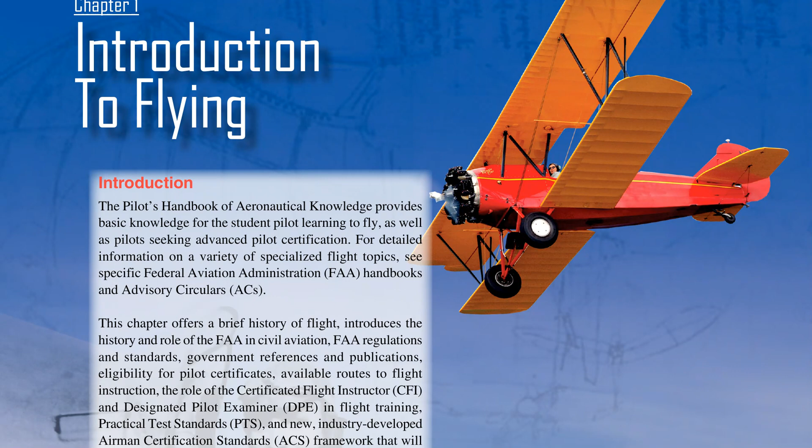For detailed information on a variety of specialized flight topics, see specific Federal Aviation Administration (FAA) handbooks and advisory circulars (ACs). This chapter offers a brief history of flight, introduces the history and role of the FAA in civil aviation, FAA regulations and standards, government references and publications, eligibility for pilot certificates, available routes to flight instruction,

the role of the Certificated Flight Instructor (CFI) and Designated Pilot Examiner (DPE) in flight training, practical test standards (PTS), and the new, industry-developed Airman Certification Standards (ACS) framework that will eventually replace the PTS.

History of flight. From prehistoric times, humans have watched the flight of birds, and longed to imitate them, but lacked the power to do so. Logic dictated that if the small muscles of birds can lift them into the air and sustain them, then the larger muscles of humans should be able to duplicate the feat. No one knew about the intricate mesh of muscles, sinew, heart, breathing system, and devices not unlike wing flaps, variable camber and spoilers of the modern airplane that enabled a bird to fly.

Still, thousands of years and countless lives were lost in attempts to fly like birds. The identity of the first birdmen who fitted themselves with wings and leapt off of cliffs in an effort to fly are lost in time, but each failure gave those who wished to fly questions that needed to be answered. Where had the wing flappers gone wrong? Philosophers, scientists, and inventors offered solutions, but no one could add wings to the human body and soar like a bird.

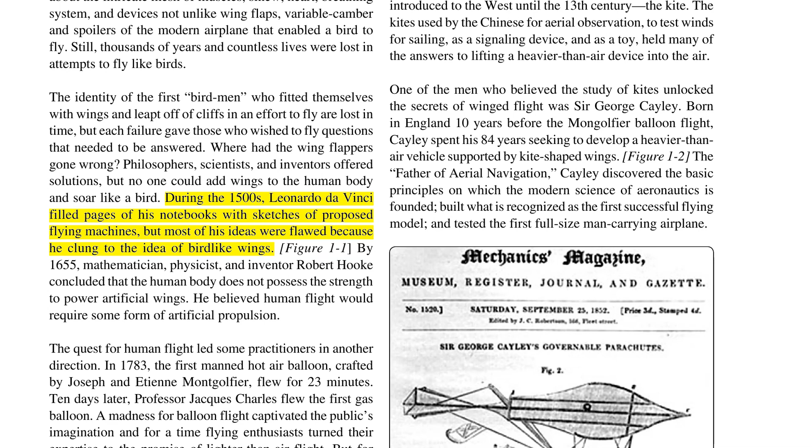During the 1500s, Leonardo da Vinci filled pages of his notebooks with sketches of proposed flying machines, but most of his ideas were flawed because he clung to the idea of bird-like wings. By 1655, mathematician, physicist, and inventor Robert Hooke concluded that the human body does not possess the strength to power artificial wings. He believed human flight would require some form of artificial propulsion.

The quest for human flight led some practitioners in another direction. In 1783, the first manned hot air balloon, crafted by Joseph and Etienne Montgolfier, flew for 23 minutes. 10 days later, Professor Jacques Charles flew the first gas balloon. A madness for balloon flight captivated the public's imagination, and for a time flying enthusiasts turned their expertise to the promise of lighter-than-air flight. But for all its majesty in the air, the balloon was little more than a billowing heap of cloth capable of no more than a one-way, downwind journey.

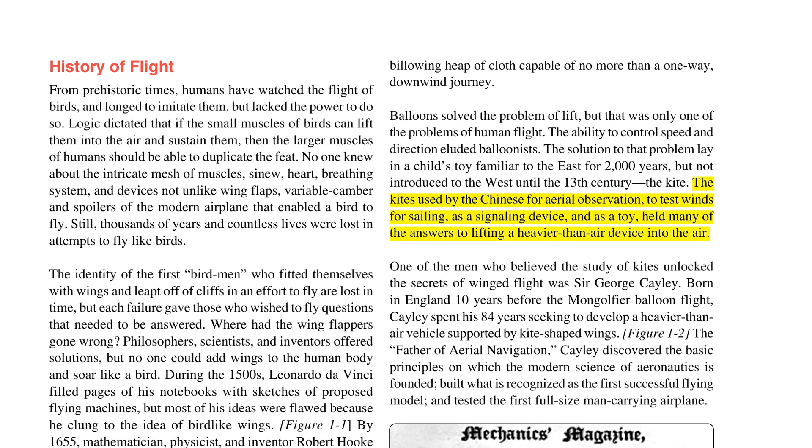Balloons solved the problem of lift, but that was only one of the problems of human flight. The ability to control speed and direction eluded balloonists. The solution to that problem lay in a child's toy familiar to the East for 2,000 years, but not introduced to the West until the 13th century, the kite. The kites used by the Chinese for aerial observation, to test winds for sailing, as a signaling device, and as a toy, held many of the answers to lifting a heavier-than-air device into the air.

One of the men who believed the study of kites unlocked the secrets of winged flight was Sir George Cayley. Born in England 10 years before the Montgolfier balloon flight, Cayley spent his 84 years seeking to develop a heavier-than-air vehicle supported by kite-shaped wings. The father of aerial navigation, Cayley discovered the basic principles on which the modern science of aeronautics is founded, built what is recognized as the first successful flying model, and tested the first full-size man-carrying airplane.

For the half-century after Cayley's death, countless scientists, flying enthusiasts, and inventors worked toward building a powered flying machine. Men, such as William Samuel Henson, who designed a huge monoplane that was propelled by a steam engine housed inside the fuselage, and Otto Lilienthal, who proved human flight in aircraft heavier than air was practical, worked toward the dream of powered flight. A dream turned into reality by Wilbur and Orville Wright at Kitty Hawk, North Carolina, on December 17, 1903.

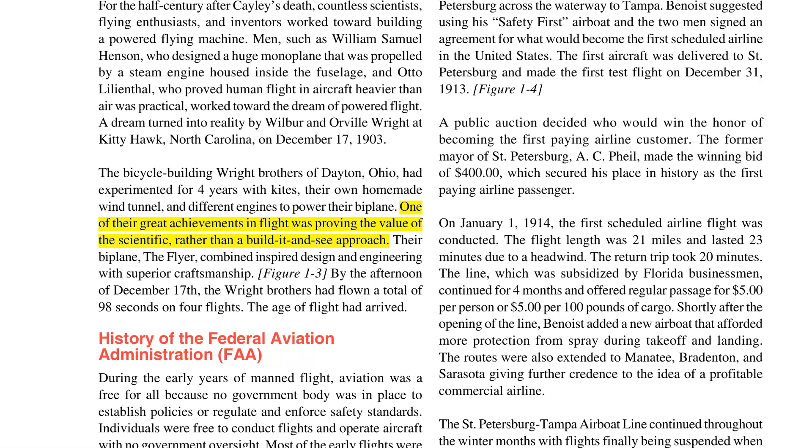The bicycle-building Wright brothers of Dayton, Ohio, had experimented for 4 years with kites, their own homemade wind tunnel, and different engines to power their biplane. One of their great achievements in flight was proving the value of the scientific, rather than a build-it-and-see approach. Their biplane, the Flyer, combined inspired design and engineering with superior craftsmanship. By the afternoon of December 17, the Wright brothers had flown a total of 98 seconds on 4 flights. The age of flight had arrived.

History of the Federal Aviation Administration (FAA). During the early years of manned flight, aviation was a free-for-all because no government body was in place to establish policies or regulate and enforce safety standards.

Individuals were free to conduct flights and operate aircraft with no government oversight. Most of the early flights were conducted for sport. Aviation was expensive and became the playground of the wealthy. Since these early airplanes were small, many people doubted their commercial value. One group of individuals believed otherwise, and they became the genesis for modern airline travel.

P. E. Fansler, a Florida businessman living in St. Petersburg, approached Tom Benoist of the Benoist Aircraft Company in St. Louis, Missouri, about starting a flight route from St. Petersburg across the waterway to Tampa. Benoist suggested using his Safety First airboat, and the two men signed an agreement for what would become the first scheduled airline in the United States. The first aircraft was delivered to St. Petersburg and made the first test flight on December 31, 1913.

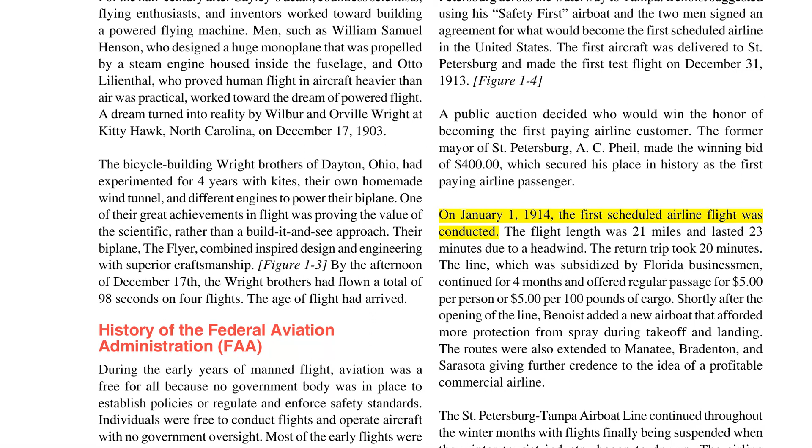Figure 1-4. A public auction decided who would win the honor of becoming the first paying airline customer. The former mayor of St. Petersburg, A.C. Pheil, made the winning bid of $400, which secured his place in history as the first paying airline passenger. On January 1, 1914, the first scheduled airline flight was conducted. The flight length was 21 miles and lasted 23 minutes due to a headwind. The return trip took 20 minutes.

The line, which was subsidized by Florida businessmen, continued for 4 months and offered regular passage for $5 per person or $5 per 100 pounds of cargo. Shortly after the opening of the line, Benoist added a new airboat that afforded more protection from spray during takeoff and landing. The routes were also extended to Manatee, Bradenton, and Sarasota, giving further credence to the idea of a profitable commercial airline.

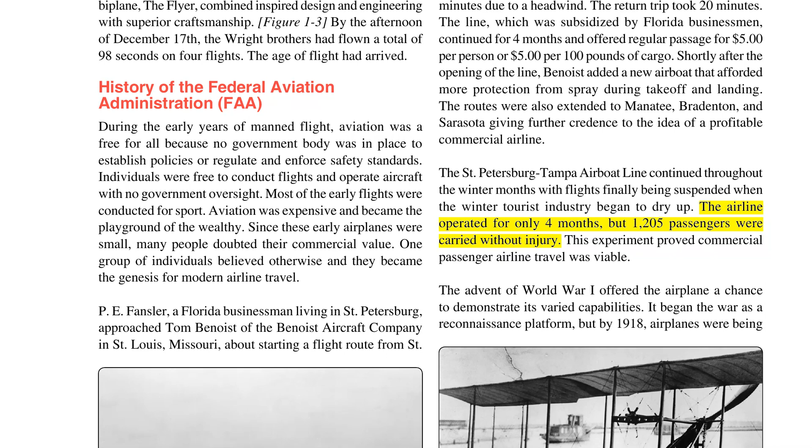The St. Petersburg-Tampa airboat line continued throughout the winter months, with flights finally being suspended when the winter tourist industry began to dry up. The airline operated for only 4 months, but 1,205 passengers were carried without injury. This experiment proved commercial passenger airline travel was viable.

The advent of World War I offered the airplane a chance to demonstrate its varied capabilities. It began the war as a reconnaissance platform, but by 1918, airplanes were being mass-produced to serve as fighters, bombers, trainers, as well as reconnaissance platforms. Aviation advocates continued to look for ways to use airplanes. Airmail service was a popular idea, but the war prevented the Postal Service from having access to airplanes. The War Department and Postal Service reached an agreement in 1918. The Army would use the mail service to train its pilots in flying cross-country.

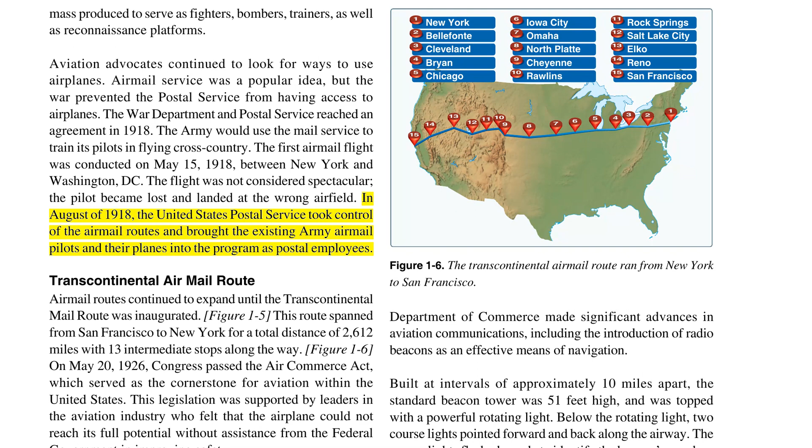The first airmail flight was conducted on May 15, 1918, between New York and Washington, D.C. The flight was not considered spectacular. The pilot became lost and landed at the wrong airfield. In August of 1918, the United States Postal Service took control of the airmail routes and brought the existing Army airmail pilots and their planes into the program as postal employees. Transcontinental Airmail Route. Airmail routes continued to expand until the Transcontinental Mail Route was inaugurated. Figure 1-5. This route spanned from San Francisco to New York for a total distance of 2,612 miles with 13 intermediate stops along the way.

Figure 1-6. On May 20, 1926, Congress passed the Air Commerce Act, which served as the cornerstone for aviation within the United States. This legislation was supported by leaders in the aviation industry who felt that the airplane could not reach its full potential without assistance from the federal government in improving safety. The Air Commerce Act charged the Secretary of Commerce with fostering air commerce, issuing and enforcing air traffic rules, licensing pilots, certificating aircraft, establishing airways, and operating and maintaining aids to air navigation.

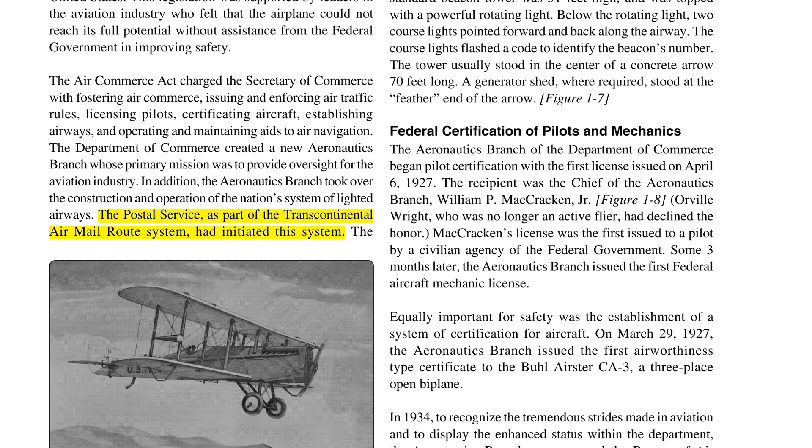The Department of Commerce created a new aeronautics branch whose primary mission was to provide oversight for the aviation industry. In addition, the aeronautics branch took over the construction and operation of the nation's system of lighted airways. The Postal Service, as part of the Transcontinental Air Mail Route System, had initiated this system. The Department of Commerce made significant advances in aviation communications, including the introduction of radio beacons as an effective means of navigation. Built at intervals of approximately 10 miles apart, the standard beacon tower was 51 feet high, and was topped with a powerful rotating light.

Below the rotating light, 2 course lights pointed forward and back along the airway. The course lights flashed a code to identify the beacon's number. The tower usually stood in the center of a concrete arrow 70 feet long. A generator shed, where required, stood at the feather end of the arrow.

Figure 1-7. Federal Certification of Pilots and Mechanics. The Aeronautics Branch of the Department of Commerce began pilot certification with the first license issued on April 6, 1927. The recipient was the Chief of the Aeronautics Branch, William P. MacCracken, Jr. Figure 1-8. Orville Wright, who was no longer an active flyer, had declined the honor.

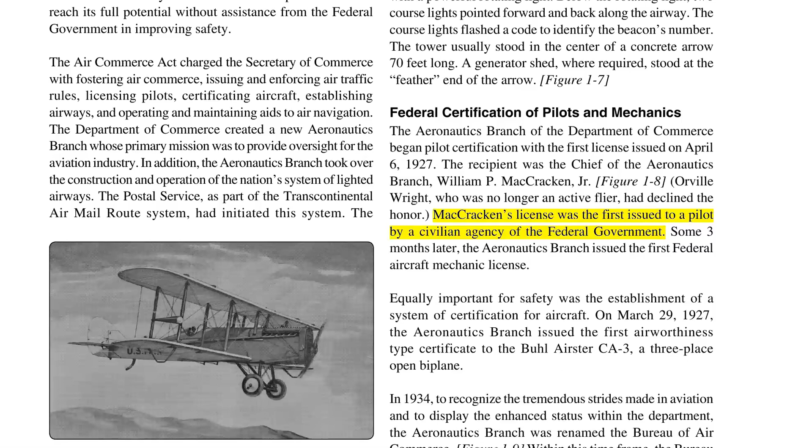MacCracken's license was the first issued to a pilot by a civilian agency of the federal government. Some 3 months later, the Aeronautics Branch issued the first federal aircraft mechanic license. Equally important for safety was the establishment of a system of certification for aircraft. On March 29, 1927, the Aeronautics Branch issued the first airworthiness type certificate to the Buhl Airster CA-3 3-place open

biplane. In 1934, to recognize the tremendous strides made in aviation and to display the enhanced status within the department, the Aeronautics Branch was renamed the Bureau of Air Commerce. Figure 1-9. Within this time frame, the Bureau of Air Commerce brought together a group of airlines and encouraged them to form the first 3 air traffic control (ATC) facilities along the established air routes.

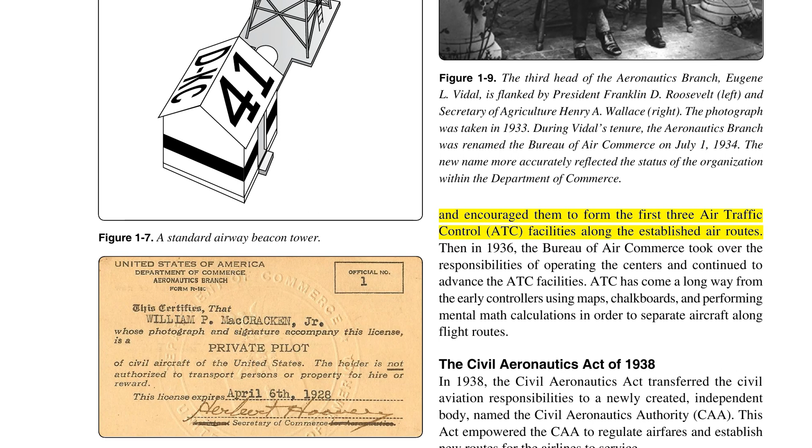Then in 1936, the Bureau of Air Commerce took over the responsibilities of operating the centers and continued to advance the ATC facilities. ATC has come a long way from the early controllers using maps, chalkboards, and performing mental math calculations in order to separate aircraft along flight routes.

The Civil Aeronautics Act of 1938. In 1938, the Civil Aeronautics Act transferred the civil aviation responsibilities to a newly created, independent body, named the Civil Aeronautics Authority (CAA). This act empowered the CAA to regulate airfares and establish new routes for the airlines to service. President Franklin Roosevelt split the CAA into two agencies, the Civil Aeronautics Administration (CAA) and the Civil Aeronautics Board (CAB). Both agencies were still part of the Department of Commerce, but the CAB functioned independently of the Secretary of Commerce.

The role of the CAA was to facilitate ATC, certification of airmen and aircraft, rule enforcement, and the development of new airways. The CAB was charged with rule-making to enhance safety, accident investigation, and the economic regulation of the airlines. Then in 1946, Congress gave the CAA the responsibility of administering the Federal Airport Program. This program was designed to promote the establishment of civil airports throughout the country.

The Federal Aviation Act of 1958. By mid-century, air traffic had increased and jet aircraft had been introduced into the civil aviation arena. A series of mid-air collisions underlined the need for more regulation of the aviation industry. Aircraft were not only increasing in numbers, but were now streaking across the skies at much higher speeds.

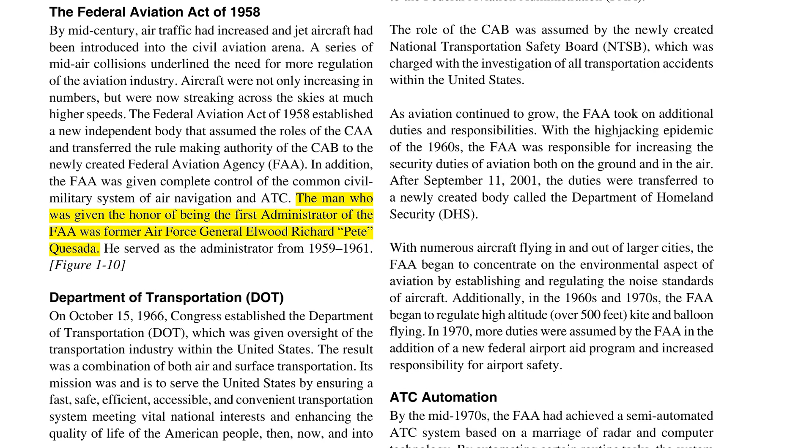The Federal Aviation Act of 1958 established a new independent body that assumed the roles of the CAA and transferred the rule-making authority of the CAB to the newly created Federal Aviation Agency (FAA). In addition, the FAA was given complete control of the Common Civil-Military System of Air Navigation and ATC. The man who was given the honor of being the first administrator of the FAA was former Air Force General Elwood Richard "Pete" Quesada. He served as the administrator from 1959 to 1961.

Figure 1-10. Department of Transportation (DOT). On October 15, 1966, Congress established the Department of Transportation (DOT), which was given oversight of the transportation industry within the United States. The result was a combination of both air and surface transportation. Its mission was and is to serve the United States by ensuring a fast, safe, efficient, accessible, and convenient transportation system meeting vital national interests and enhancing the quality of life of the American people, then, now, and into the future. The DOT began operation on April 1, 1967.

At this same time, the Federal Aviation Agency was renamed to the Federal Aviation Administration (FAA). The role of the CAB was assumed by the newly created National Transportation Safety Board (NTSB), which was charged with the investigation of all transportation accidents within the United States. As aviation continued to grow, the FAA took on additional duties and responsibilities. With the hijacking epidemic of the 1960s, the FAA was responsible for increasing the security duties of aviation both on the ground and in the air. After September 11, 2001, the duties were transferred to a newly created body called the Department of Homeland Security (DHS).

With numerous aircraft flying in and out of larger cities, the FAA began to concentrate on the environmental aspect of aviation by establishing and regulating the noise standards of aircraft. Additionally, in the 1960s and 1970s, the FAA began to regulate high altitude (over 500 feet) kite and balloon flying. In 1970, more duties were assumed by the FAA in the addition of a new federal airport aid program and increased responsibility for airport safety.

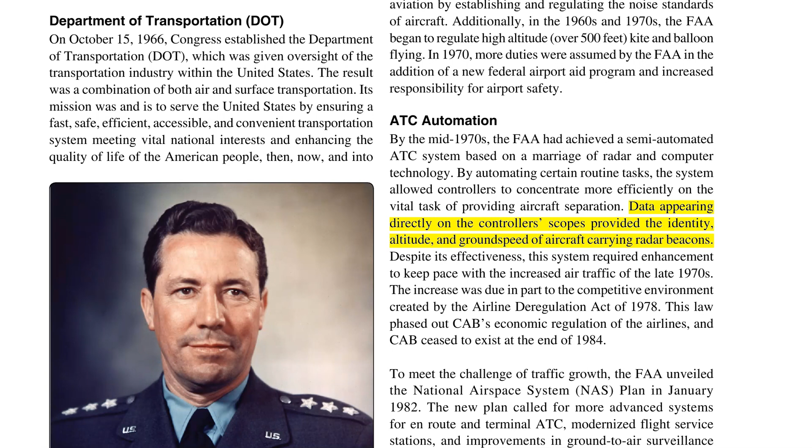ATC automation. By the mid-1970s, the FAA had achieved a semi-automated ATC system based on a marriage of radar and computer technology. By automating certain routine tasks, the system allowed controllers to concentrate more efficiently on the vital task of providing aircraft separation. Data appearing directly on the controller's scopes provided the identity, altitude, and ground speed of aircraft carrying radar beacons. Despite its effectiveness, this system required enhancement to keep pace with the increased air traffic of the late 1970s.

The increase was due in part to the competitive environment created by the Airline Deregulation Act of 1978. This law phased out CAB's economic regulation of the airlines, and CAB ceased to exist at the end of 1984.

To meet the challenge of traffic growth, the FAA unveiled the National Airspace System (NAS) plan in January 1982. The new plan called for more advanced systems for en route and terminal ATC, modernized flight service stations, and improvements in ground-to-air surveillance and communication.

The Professional Air Traffic Controllers Organization (PATCO) strike. While preparing the NAS plan, the FAA faced a strike by key members of its workforce. An earlier period of discord between management and the Professional Air Traffic Controllers Organization, PATCO, culminated in a 1970 sickout by 3,000 controllers.

Although controllers subsequently gained additional wage and retirement benefits, another period of tension led to an illegal strike in August 1981. The government dismissed over 11,000 strike participants and decertified PATCO. By the spring of 1984, the FAA ended the last of the special restrictions imposed to keep the airspace system operating safely during the strike.

The Airline Deregulation Act of 1978. Until 1978, the CAB regulated many areas of commercial aviation such as fares, routes, and schedules. The Airline Deregulation Act of 1978, however, removed many of these controls, thus changing the face of civil aviation in the United States. After deregulation, unfettered free competition ushered in a new era in passenger air travel.

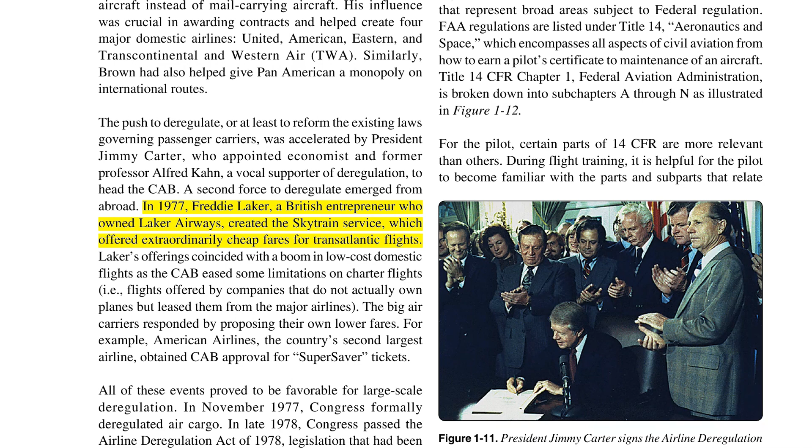In 1977, Freddie Laker, a British entrepreneur who owned Laker Airways, created the Skytrain service, which offered extraordinarily cheap fares for transatlantic flights. Laker's offerings coincided with a boom in low-cost domestic flights as the CAB eased some limitations on charter flights, i.e., flights offered by companies that do not actually own planes but lease them from the major airlines.

The big air carriers responded by proposing their own lower fares. For example, American Airlines, the country's second-largest airline, obtained CAB approval for SuperSaver tickets. All of these events proved to be favorable for large-scale deregulation. In November 1977, Congress formally deregulated air cargo.

In late 1978, Congress passed the Airline Deregulation Act of 1978, legislation that had been principally authored by Senators Edward Kennedy and Howard Cannon. [Figure 1-11] There was stiff opposition to the bill, from the major airlines who feared free competition, from labor unions who feared non-union employees, and from safety advocates who feared that safety would be sacrificed. Public support was, however, strong enough to pass the act.

The act appeased the major airlines by offering generous subsidies and pleased workers by offering high unemployment benefits if they lost their jobs as a result. The most important effect of the act, whose laws were slowly phased in, was on the passenger market. For the first time in 40 years, airlines could enter the market or, from 1981, expand their routes as they saw fit. Airlines, from 1982, also had full freedom to set their fares. In 1984, the CAB was finally abolished since its primary duty of regulating the airline industry was no longer necessary.

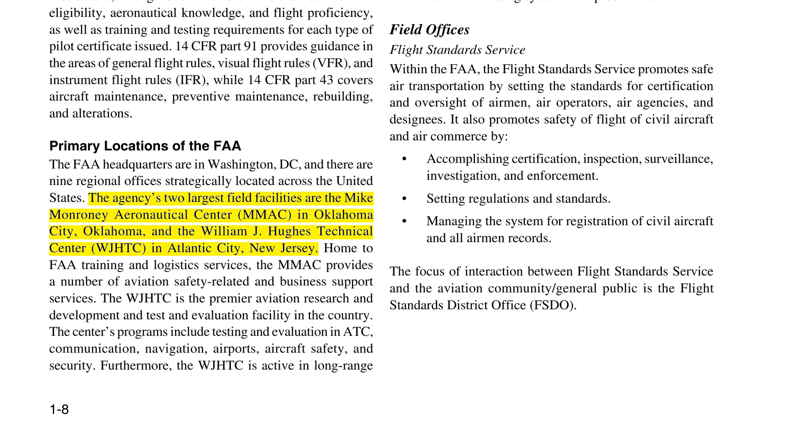Primary locations of the FAA. The FAA headquarters are in Washington, D.C., and there are 9 regional offices strategically located across the United States. The agency's 2 largest field facilities are the Mike Monroney Aeronautical Center (MMAC) in Oklahoma City, Oklahoma, and the William J. Hughes Technical Center (WJHTC) in Atlantic City, New Jersey. Home to FAA training and logistics services, the MMAC provides a number of aviation safety-related and business support services.

The WJHTC is the premier aviation research and development and test and evaluation facility in the country. The center's programs include testing and evaluation in ATC, communication, navigation, airports, aircraft safety, and security. Furthermore, the WJHTC is active in long-range development of innovative aviation systems and concepts, development of new ATC equipment and software, and modification of existing systems and procedures.

Field offices. Flight Standards Service. Within the FAA, the Flight Standards Service promotes safe air transportation by setting the standards for certification and oversight of airmen, air operators, air agencies, and designees. It also promotes safety of flight of civil aircraft and air commerce by accomplishing certification, inspection, surveillance, investigation, and enforcement, setting regulations and standards, managing the system for registration of civil aircraft and all airmen records. The focus of interaction between Flight Standards Service and the aviation community/general public is the Flight Standards District Office (FSDO).

Flight Standards District Office (FSDO). The FAA has approximately 80 FSDOs. Figure 1-13. These offices provide information and services for the aviation community. FSDO phone numbers are listed in the telephone directory under Government Offices, DOT, FAA. Another convenient method of finding a local office is to use the FSDO locator available at www.faa.gov/about/office_org/field_offices/fsdo.

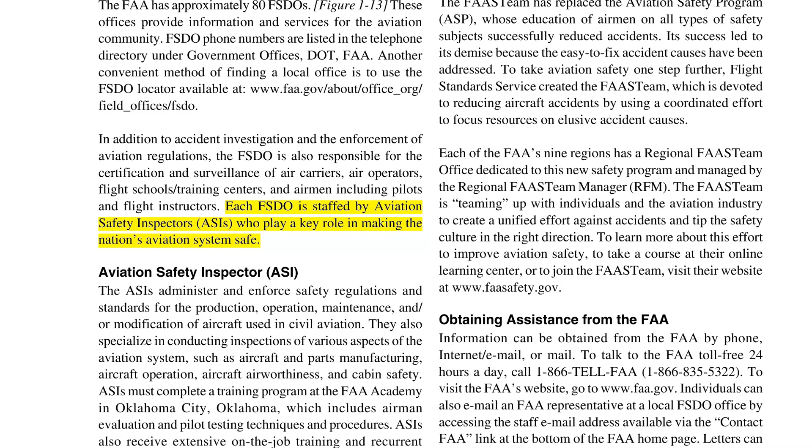In addition to accident investigation and the enforcement of aviation regulations, the FSDO is also responsible for the certification and surveillance of air carriers, air operators, flight schools/training centers, and airmen including pilots and flight instructors. Each FSDO is staffed by aviation safety inspectors (ASIs), who play a key role in making the nation's aviation system safe.

Aviation Safety Inspector (ASI). The ASIs administer and enforce safety regulations and standards for the production, operation, maintenance, and/or modification of aircraft used in civil aviation. They also specialize in conducting inspections of various aspects of the aviation system, such as aircraft and parts manufacturing, aircraft operation, aircraft airworthiness, and cabin safety.

ASIs must complete a training program at the FAA Academy in Oklahoma City, Oklahoma, which includes airman evaluation and pilot testing techniques and procedures. ASIs also receive extensive on-the-job training and recurrent training on a regular basis. The FAA has approximately 3,700 inspectors located in its FSDO offices. All questions concerning pilot certification, and/or requests for other aviation information or services, should be directed to the local FSDO.

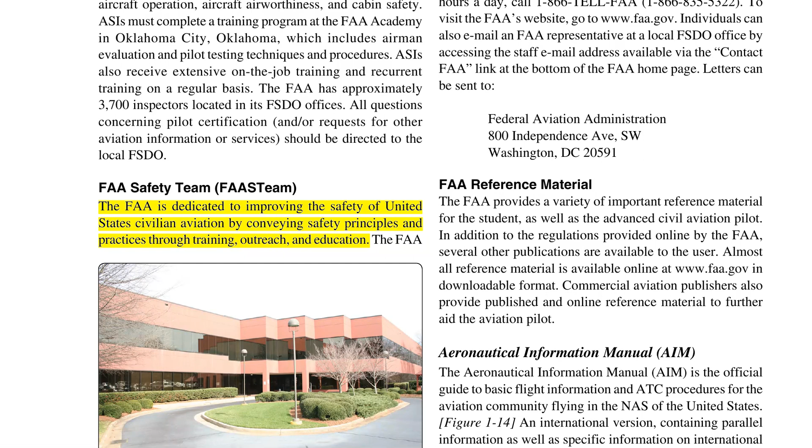FAA Safety Team (FAASTeam). The FAA is dedicated to improving the safety of United States civilian aviation by conveying safety principles and practices through training, outreach, and education. The FAASTeam exemplifies this commitment. The FAASTeam has replaced the Aviation Safety Program (ASP), whose education of airmen on all types of safety subjects successfully reduced accidents. Its success led to its demise because the easy-to-fix accident causes have been addressed. To take aviation safety one step further, Flight Standards Service created the FAASTeam, which is devoted to reducing aircraft accidents by using a coordinated effort to focus resources on elusive accident causes.

Each of the FAA's 9 regions has a regional FAASTeam office dedicated to this new safety program and managed by the Regional FAASTeam Manager (RFM). The FAASTeam is teaming up with individuals in the aviation industry to create a unified effort against accidents and tip the safety culture in the right direction. To learn more about this effort to improve aviation safety, to take a course at their online learning center, or to join the FAASTeam, visit their website at www.faasafety.gov.

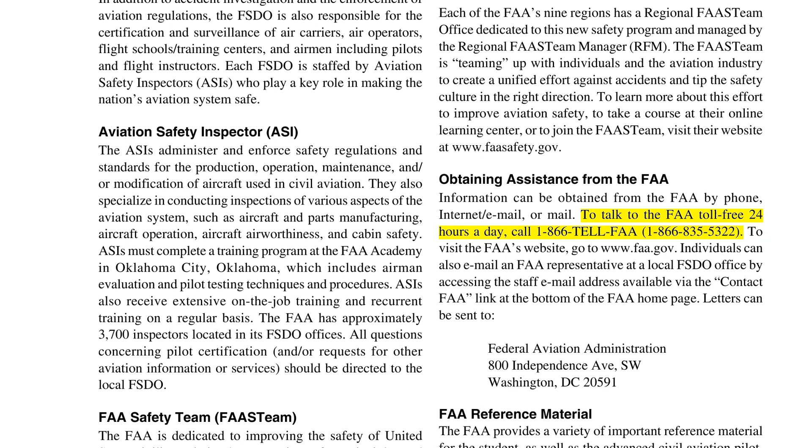Obtaining assistance from the FAA. Information can be obtained from the FAA by phone, internet/email, or mail. To talk to the FAA toll-free 24 hours a day, call 1-866-TELL-FAA, 1-866-835-5322. To visit the FAA's website, go to www.faa.gov. Individuals can also email an FAA representative at a local FSDO office by accessing the staff email address available via the Contact FAA link at the bottom of the FAA homepage. Letters can be sent to

FAA reference material. The FAA provides a variety of important reference material for the student, as well as the advanced civil aviation pilot. In addition to the regulations provided online by the FAA, several other publications are available to the user. Almost all reference material is available online at www.faa.gov in downloadable format.

Commercial aviation publishers also provide published and online reference material to further aid the aviation pilot. Aeronautical Information Manual, AIM. The Aeronautical Information Manual, AIM, is the official guide to basic flight information and ATC procedures for the aviation community flying in the NAS of the United States. Figure 1-14, an international version, containing parallel information as well as specific information on international airports, is also available.

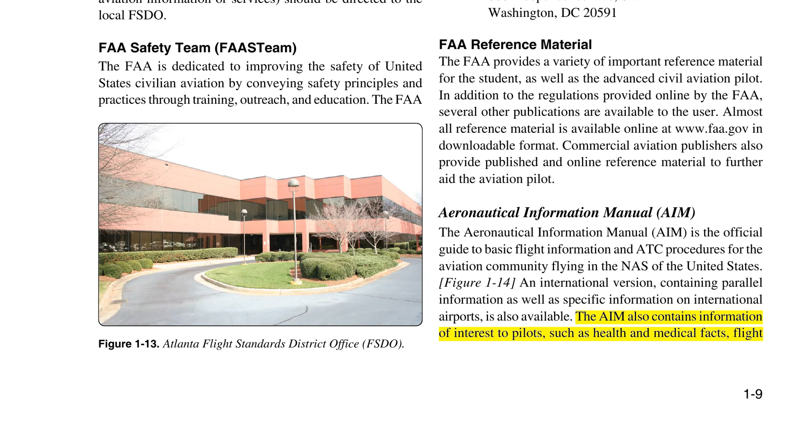The AIM also contains information of interest to pilots, such as health and medical facts, flight, Federal Aviation Administration, 800 Independence Avenue, Southwest, Washington, D.C. 20591. Safety, a pilot/controller glossary of terms used in the system, and information on safety, accidents, and reporting of hazards.

This manual is offered for sale on a subscription basis or is available online at http://bookstore.gpo.gov. Order forms are provided at the beginning of the manual or online and should be sent to the Superintendent of Documents, United States Government Printing Office, GPO. The AIM is complemented by other operational publications that are available via separate subscriptions or online.

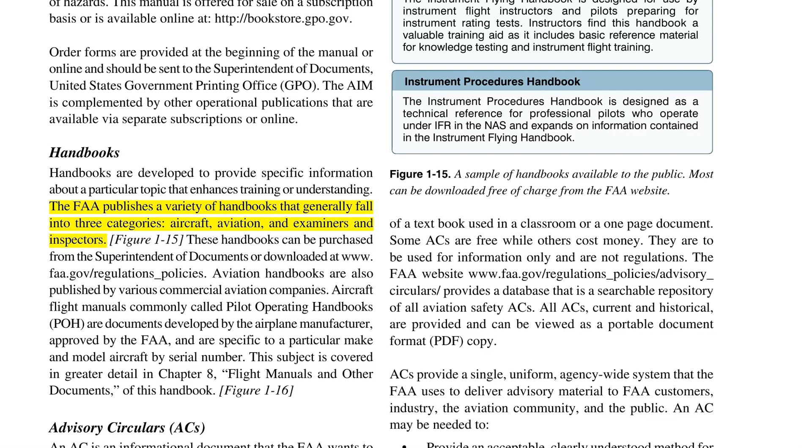Handbooks. Handbooks are developed to provide specific information about a particular topic that enhances training or understanding. The FAA publishes a variety of handbooks that generally fall into three categories: aircraft, aviation, and examiners and inspectors. Figure 1-15. These handbooks can be purchased from the Superintendent of Documents or downloaded at www.faa.gov/regulations_policies. Aviation handbooks are also published by various commercial aviation companies.

Aircraft flight manuals, commonly called pilot operating handbooks, POH, are documents developed by the airplane manufacturer, approved by the FAA, and are specific to a particular make and model aircraft by serial number. This subject is covered in greater detail in Chapter 8, Flight Manuals and Other Documents, of this handbook.

Figure 1-16. Advisory Circulars, ACs. An AC is an informational document that the FAA wants to distribute to the aviation community. This can be in the form: Aeronautical Information Manual, AIM. The Aeronautical Information Manual is designed to provide the aviation community with basic flight information and ATC procedures for use in the NAS of the United States. It also contains the fundamentals required in order to fly in the United States NAS, including items of interest to pilots concerning health/medical facts, factors affecting flight safety, etc.

Aircraft Flying Handbooks, by category. The aircraft flying handbooks are designed as technical manuals to introduce basic pilot skills and knowledge that are essential for piloting aircraft. They provide information on transition to other aircraft and the operation of various aircraft systems.

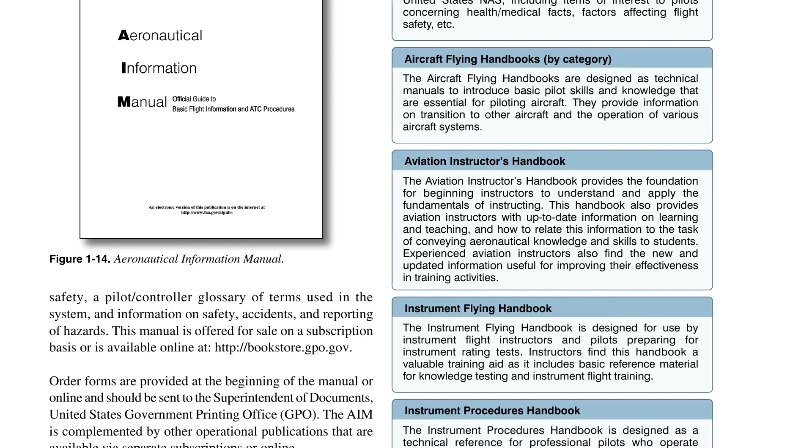Aviation Instructor's Handbook. The Aviation Instructor's Handbook provides the foundation for beginning instructors to understand and apply the fundamentals of instructing. This handbook also provides aviation instructors with up-to-date information on learning and teaching, and how to relate this information to the task of conveying aeronautical knowledge and skills to students. Experienced aviation instructors also find the new and updated information useful for improving their effectiveness in training activities.

Instrument Flying Handbook. The Instrument Flying Handbook is designed for use by instrument flight instructors and pilots preparing for instrument rating tests. Instructors find this handbook a valuable training aid as it includes basic reference material for knowledge testing and instrument flight training. Instrument Procedures Handbook. The Instrument Procedures Handbook is designed as a technical reference for professional pilots who operate under IFR in the NAS and expands on information contained in the Instrument Flying Handbook.

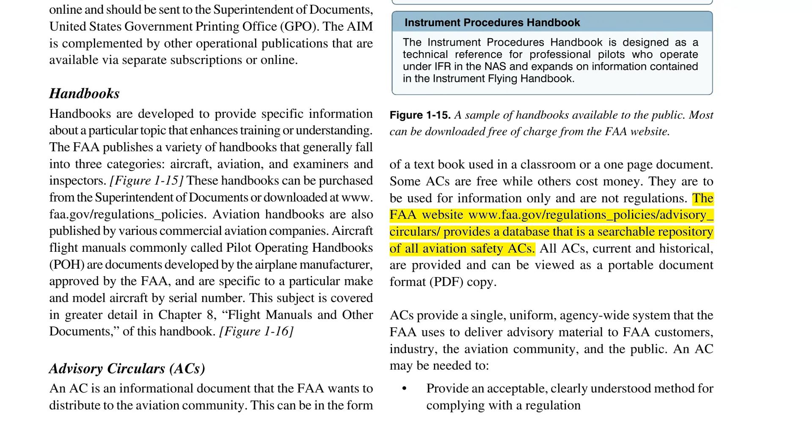Of a textbook used in a classroom or a one-page document. Some ACs are free while others cost money. They are to be used for information only and are not regulations. The FAA website www.faa.gov/regulations_policies/advisory_circulars/ provides a database that is a searchable repository of all aviation safety ACs. All ACs, current and historical, are provided and can be viewed as a portable document format, PDF, copy.

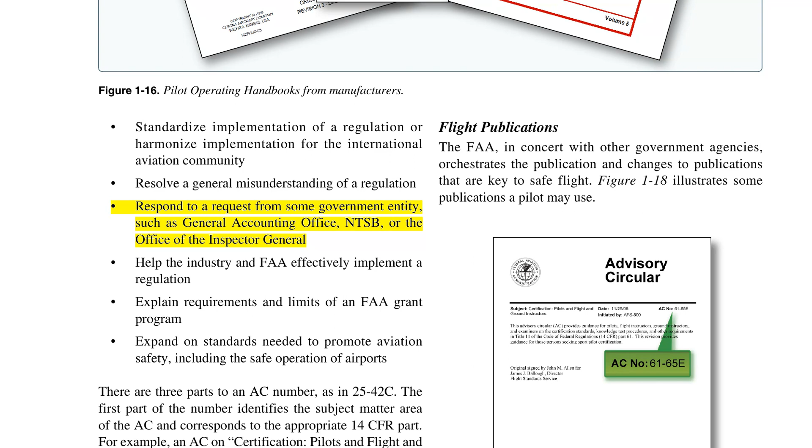ACs provide a single, uniform, agency-wide system that the FAA uses to deliver advisory material to FAA customers, industry, the aviation community, and the public. An AC may be needed to provide an acceptable, clearly understood method for complying with a regulation, standardize implementation of a regulation or harmonize implementation for the international aviation community, resolve a general misunderstanding of a regulation, respond to a request from some government entity, such as General Accounting Office, NTSB, or the Office of the Inspector General, help the industry and FAA effectively implement a regulation, explain requirements and limits of an FAA grant program, expand on standards needed to promote aviation safety, including the safe operation of airports.

There are 3 parts to an AC number, as in 25-42C. The first part of the number identifies the subject matter area of the AC and corresponds to the appropriate 14 CFR part. For example, an AC on certification, pilots and flight and ground instructors is numbered as AC 61-65E.

Since ACs are numbered sequentially within each subject area, the second part of the number beginning with the dash identifies this sequence. The third part of the number is a letter assigned by the originating office and shows the revision sequence if an AC is revised. The first version of an AC does not have a revision letter. In Figure 1-17, this is the fifth revision, as designated by the E.

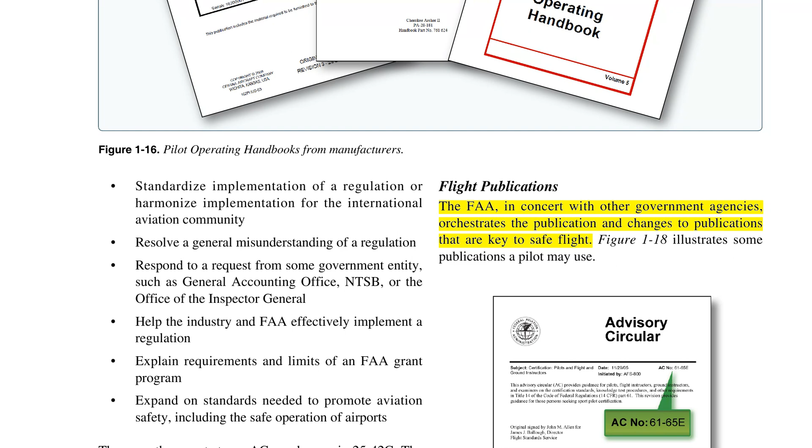Flight publications. The FAA, in concert with other government agencies, orchestrates the publication and changes to publications that are key to safe flight. Figure 1-18 illustrates some publications a pilot may use. Pilot and aeronautical information. Notices to airmen, NOTAMs. Notices to airmen, or NOTAMs, are time-critical aeronautical information either temporary in nature or not sufficiently known in advance to permit publication on aeronautical charts or in other operational publications. The information receives immediate dissemination via the National Notice to Airmen, NOTAM, system.

NOTAMs contain current notices to airmen that are considered essential to the safety of flight, as well as supplemental data affecting other operational publications. There are many different reasons that NOTAMs are issued. Following are some of those reasons. Hazards, such as air shows, parachute jumps, kite flying, and rocket launches. Flights by important people such as heads of state. Closed runways. Inoperable radio navigational aids. Military exercises with resulting airspace restrictions.

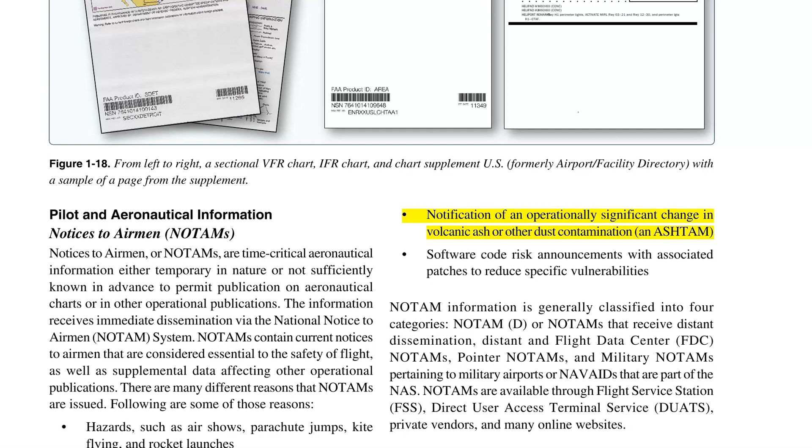Inoperable lights on tall obstructions. Temporary erection of obstacles near airfields. Passage of flocks of birds through airspace. A NOTAM in this category is known as a BIRDTAM. Notifications of runway/taxiway/apron status with respect to snow, ice, and standing water, a SNOWTAM. Notification of an operationally significant change in volcanic ash or other dust contamination, an ASHTAM. Software code risk announcements with associated patches to reduce specific vulnerabilities.

NOTAM information is generally classified into four categories: NOTAM (D), or NOTAMs that receive distant dissemination, flight data center (FDC) NOTAMs, pointer NOTAMs, and military NOTAMs pertaining to military airports or NAVAIDs that are part of the NAS. NOTAMs are available through Flight Service Station (FSS), Direct User Access Terminal Service (DUATS), private vendors, and many online websites.

NOTAM (D) information. NOTAM (D) information is disseminated for all navigational facilities that are part of the NAS, and all public use airports, seaplane bases, and heliports listed in the Chart Supplement U.S., formerly Airport/Facility Directory. NOTAM (D) information now includes such data as taxiway closures, personnel and equipment near or crossing runways, and airport lighting aids that do not affect instrument approach criteria, such as Visual Approach Slope Indicator (VASI). All D NOTAMs are required to have one of the following keywords as the first part of the text: RWY, TWY, RAMP, APRON, AD, OBST, NAV, COM, SVC, AIRSPACE, U, or O.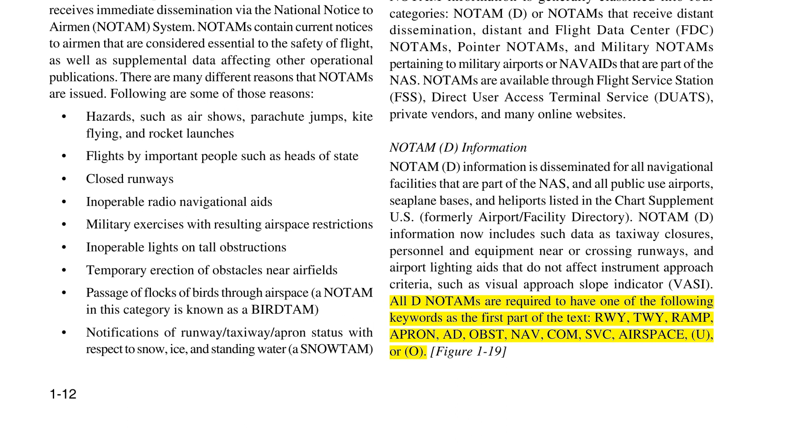Figure 1-19. FDC NOTAMs. FDC NOTAMs are issued by the National Flight Data Center and contain information that is regulatory in nature pertaining to flight, including, but not limited to, changes to charts, procedures, and airspace usage. FDC NOTAMs refer to information that is regulatory in nature and includes the following: interim IFR flight procedures. 1. Airway structure changes. 2. Instrument approach procedure changes, excludes departure procedures (DPs) and standard terminal arrivals (STARs). 3. Airspace changes in general. 4. Special instrument approach procedure changes. Temporary flight restrictions, discussed in Chapter 15.

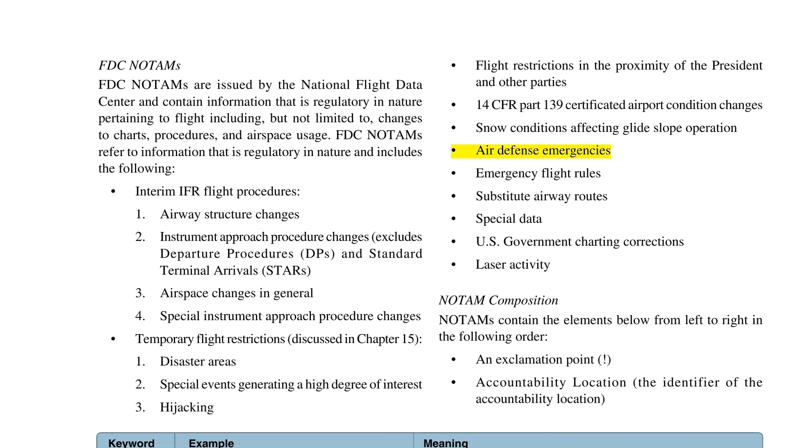1. Disaster areas. 2. Special events generating a high degree of interest. 3. Hijacking. Flight restrictions in the proximity of the President and other parties. 14 CFR Part 139 certificated airport condition changes. Snow conditions affecting glide slope operation. Air defense emergencies. Emergency flight rules. Substitute airway routes. Special data. U.S. government charting corrections. Laser activity.

NOTAM composition. NOTAMs contain the elements below from left to right in the following order. An exclamation point. Accountability location, the identifier of the accountability location. Affected location, the identifier of the affected facility or location. Keyword, one of the following: RWY, TWY, RAMP, APRON, AD, COM, NAV, SVC, OBST, AIRSPACE, U, and O. Surface identification, optional. This shall be the runway identification for runway-related NOTAMs, the taxiway identification for taxiway-related NOTAMs, or the ramp/apron identification for ramp/apron-related NOTAMs.

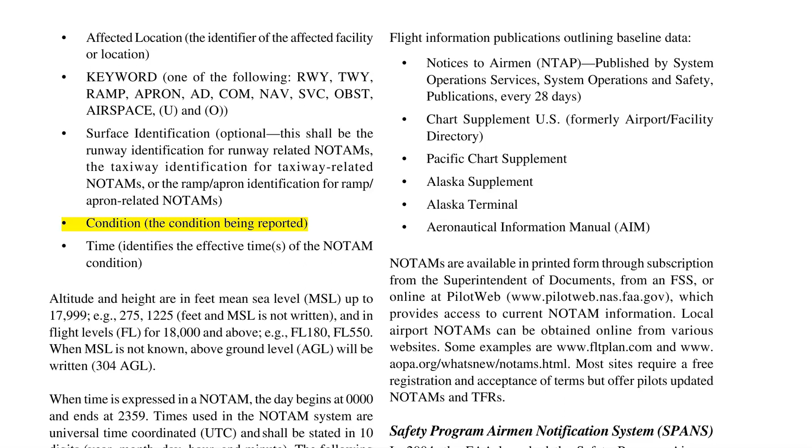Condition, the condition being reported. Time, identifies the effective times of the NOTAM condition. Altitude and height are in feet mean sea level (MSL) up to 17,999, for example, 275, 1,225 feet, and MSL is not written, and in flight levels (FL) for 18,000 and above, for example, FL180, FL550. When MSL is not known, above ground level (AGL) will be written, 304 AGL.

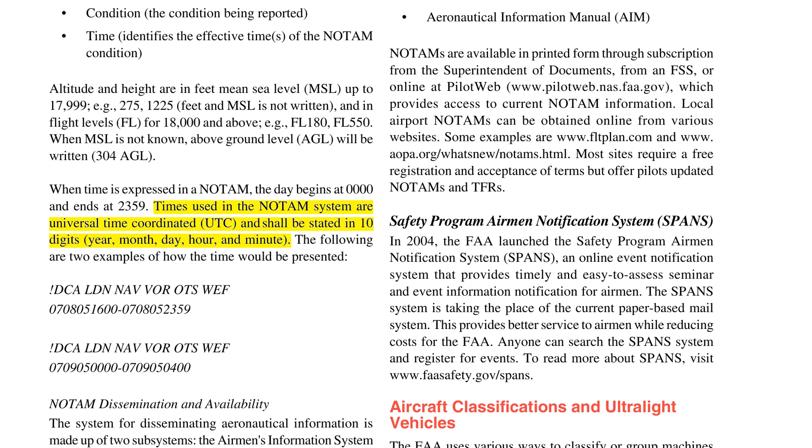When time is expressed in a NOTAM, the day begins at 0000 and ends at 2359. Times used in the NOTAM system are Coordinated Universal Time (UTC) and shall be stated in 10 digits: year, month, day, hour, and minute. The following are two examples of how the time would be presented. NOTAM dissemination and availability. The system for disseminating aeronautical information is made up of two subsystems, the Airmen's Information System (AIS) and the NOTAM system.

The AIS consists of charts and publications and is disseminated by the following methods. Aeronautical charts depicting permanent baseline data: IFR charts, en route high altitude conterminous US, en route low altitude conterminous US, Alaska charts, and Pacific charts; US terminal procedures, departure procedures (DPs), standard terminal arrivals (STARs), and standard instrument approach procedures (SIAPs); VFR charts, sectional aeronautical charts, terminal area charts (TAC), and world aeronautical charts (WAC).

Flight information publications outlining baseline data. Notices to Airmen (NTAP) published by System Operations Services, System Operations, and Safety, publications, every 28 days. Chart Supplement US, formerly Airport/Facility Directory. Pacific Chart Supplement. Alaska Supplement. Alaska Terminal. Aeronautical Information Manual (AIM).

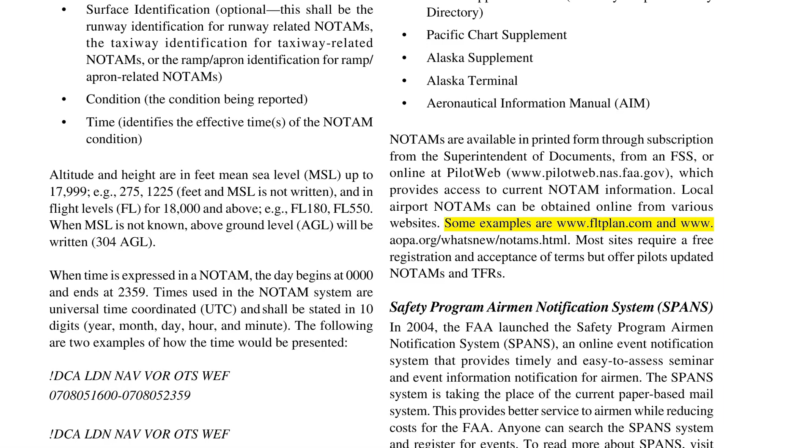NOTAMs are available in printed form through subscription from the Superintendent of Documents, from an FSS, or online at PilotWeb, www.pilotweb.nas.faa.gov, which provides access to current NOTAM information. Local airport NOTAMs can be obtained online from various websites. Some examples are www.fltplan.com and www.aopa.org/whatsnew/notams.html. Most sites require a free registration and acceptance of terms but offer pilots updated NOTAMs and TFRs.

Safety Program Airmen Notification System (SPANS). In 2004, the FAA launched the Safety Program Airmen Notification System, SPANS, an online event notification system that provides timely and easy-to-access seminar and event information notification for airmen. The SPANS system is taking the place of the current paper-based mail system. This provides better service to airmen while reducing costs for the FAA. Anyone can search the SPANS system and register for events. To read more about SPANS, visit www.faasafety.gov/SPANS.

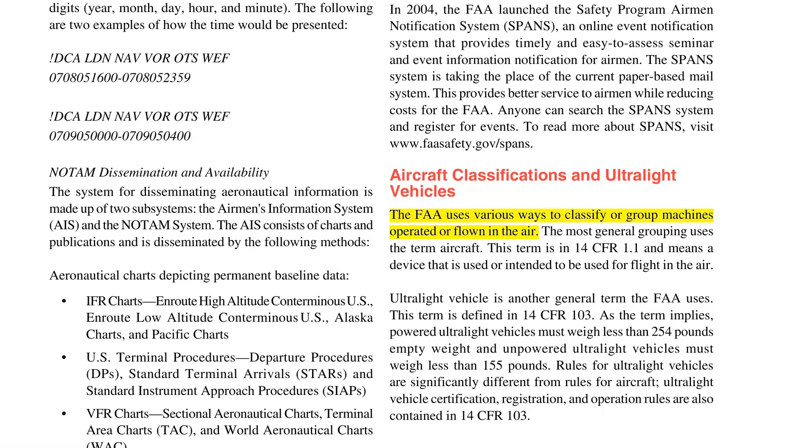Aircraft classifications and ultralight vehicles. The FAA uses various ways to classify or group machines operated or flown in the air. The most general grouping uses the term aircraft. This term is in 14 CFR 1.1 and means a device that is used or intended to be used for flight in the air. Ultralight vehicle is another general term the FAA uses. This term is defined in 14 CFR 103. As the term implies, powered ultralight vehicles must weigh less than 254 pounds empty weight and unpowered ultralight vehicles must weigh less than 155 pounds. Rules for ultralight vehicles are significantly different from rules for aircraft. Ultralight vehicle certification, registration, and operation rules are also contained in 14 CFR 103.

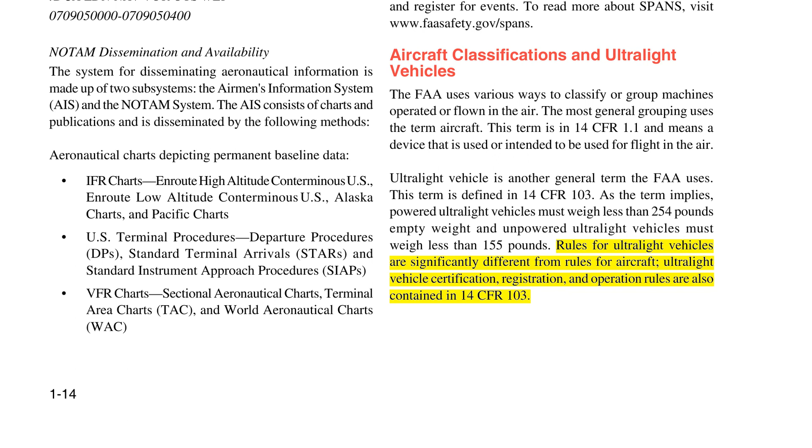The FAA differentiates aircraft by their characteristics and physical properties. Key groupings defined in 14 CFR 1.1 include airplane, an engine-driven fixed-wing aircraft heavier than air, that is supported in flight by the dynamic reaction of the air against its wings. Glider, a heavier-than-air aircraft, that is supported in flight by the dynamic reaction of the air against its lifting surfaces and whose free flight does not depend principally on an engine. Lighter-than-air aircraft, an aircraft that can rise and remain suspended by using contained gas weighing less than the air that is displaced by the gas. Airship, an engine-driven lighter-than-air aircraft that can be steered. Balloon, a lighter-than-air aircraft that is not engine-driven, and that sustains flight through the use of either gas buoyancy or an airborne heater.

Powered lift, a heavier-than-air aircraft capable of vertical takeoff, vertical landing, and low-speed flight that depends principally on engine-driven lift devices or engine thrust for lift during these flight regimes and on non-rotating airfoils for lift during horizontal flight. Powered parachute, a powered aircraft comprised of a flexible or semi-rigid wing connected to a fuselage so that the wing is not in position for flight until the aircraft is in motion. The fuselage of a powered parachute contains the aircraft engine, a seat for each occupant, and is attached to the aircraft's landing gear. Rocket, an aircraft propelled by ejected expanding gases generated in the engine from self-contained propellants and not dependent on the intake of outside substances. It includes any part which becomes separated during the operation.

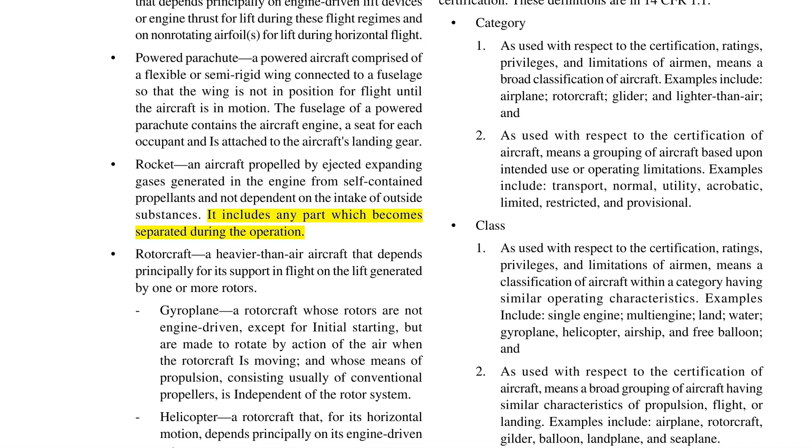Rotorcraft, a heavier-than-air aircraft that depends principally for its support in flight on the lift generated by one or more rotors. Gyroplane, a rotorcraft whose rotors are not engine-driven, except for initial starting, but are made to rotate by action of the air when the rotorcraft is moving, and whose means of propulsion, consisting usually of conventional propellers, is independent of the rotor system. Helicopter, a rotorcraft that, for its horizontal motion, depends principally on its engine-driven rotors. Weight shift control, a powered aircraft with a framed pivoting wing and a fuselage controllable only in pitch and roll by the pilot's ability to change the aircraft's center of gravity. Size and weight are other methods used in 14 CFR 1.1 to group aircraft.

Large aircraft, an aircraft of more than 12,500 pounds, maximum certificated takeoff weight. Light sport aircraft, LSA, an aircraft, other than a helicopter or powered lift that, since its original certification, has continued to meet the definition in 14 CFR 1.1. LSA can include airplanes, airships, balloons, gliders, gyroplanes, powered parachutes, and weight shift control. Small aircraft, aircraft of 12,500 pounds or less, maximum certificated takeoff weight. We also use broad classifications of aircraft with respect to the certification of airmen or with respect to the certification of the aircraft themselves.

See the next section, Pilot Certifications, and Chapter 3, for further discussion of certification. These definitions are in 14 CFR 1.1. Center of gravity with respect to the wing. Flight control of the aircraft depends on the wing's ability to flexibly deform rather than the use of control surfaces.

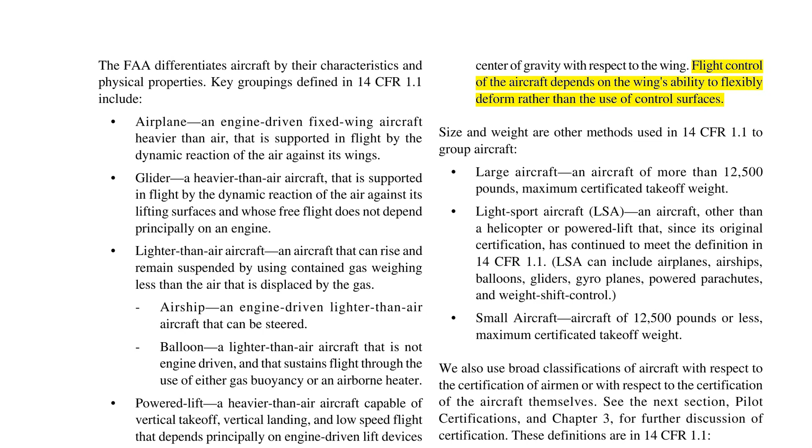Category: 1. As used with respect to the certification, ratings, privileges, and limitations of airmen, means a broad classification of aircraft. Examples include airplane, rotorcraft, glider, and lighter than air. And 2. As used with respect to the certification of aircraft, means a grouping of aircraft based upon intended use or operating limitations. Examples include transport, normal, utility, acrobatic, limited, restricted, and provisional.

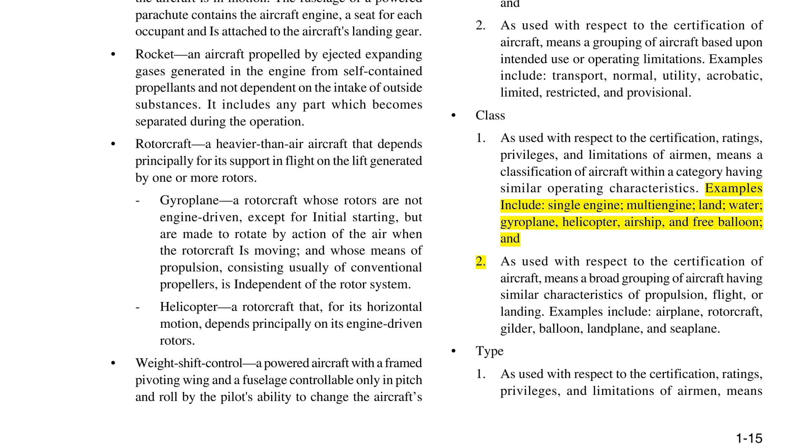Class: 1. As used with respect to the certification, ratings, privileges, and limitations of airmen, means a classification of aircraft within a category having similar operating characteristics. Examples include single engine, multi-engine, land, water, gyroplane, helicopter, airship, and free balloon. And 2. As used with respect to the certification of aircraft, means a broad grouping of aircraft having similar characteristics of propulsion, flight, or landing. Examples include airplane, rotorcraft, glider, balloon, landplane, and seaplane.

Type: 1. As used with respect to the certification, ratings, privileges, and limitations of airmen, means a specific make and basic model of aircraft, including modifications thereto that do not change its handling or flight characteristics. Examples include 737-700, G4, and 1900. And 2. As used with respect to the certification of aircraft, means those aircraft which are similar in design. Examples include 737-700 and 737-700C, G4 and G4X, and 1900 and 1900C. This system of definitions allows the FAA to group and regulate aircraft to provide for their safe operation.

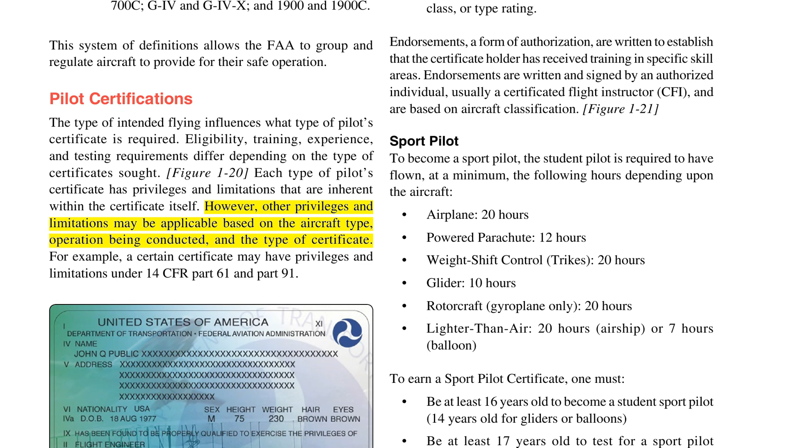Pilot certifications. The type of intended flying influences what type of pilot certificate is required. Eligibility, training, experience, and testing requirements differ depending on the type of certificate sought. Figure 1-20, each type of pilot certificate has privileges and limitations that are inherent within the certificate itself. However, other privileges and limitations may be applicable based on the aircraft type, operation being conducted, and the type of certificate. For example, a certain certificate may have privileges and limitations under 14 CFR Part 61 and Part 91. Privileges define where and when the pilot may fly, with whom they may fly, the purpose of the flight, and the type of aircraft they are allowed to fly.

Limitations. The FAA may impose limitations on a pilot certificate if, during training or the practical test, the pilot does not demonstrate all skills necessary to exercise all privileges of a privilege level, category, class, or type rating. Endorsements, a form of authorization, are written to establish that the certificate holder has received training in specific skill areas. Endorsements are written and signed by an authorized individual, usually a Certificated Flight Instructor, CFI, and are based on aircraft classification. Figure 1-21.

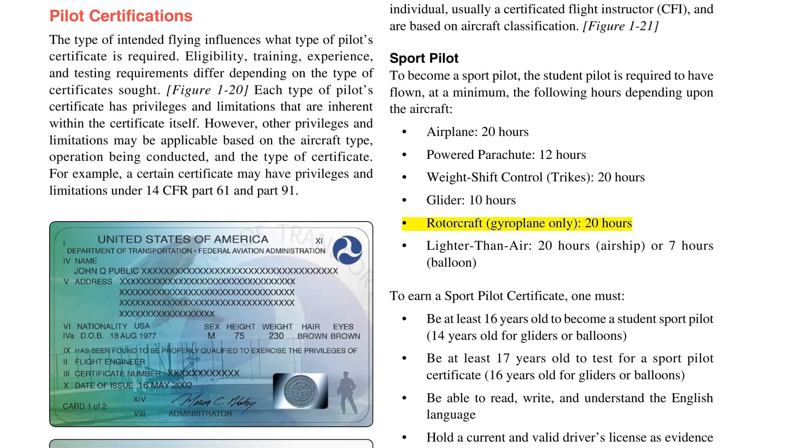Sport pilot. To become a sport pilot, the student pilot is required to have flown, at a minimum, the following hours depending upon the aircraft. Airplane, 20 hours. Powered parachute, 12 hours. Weight shift control, trikes, 20 hours. Glider, 10 hours. Rotorcraft, gyroplane only, 20 hours. Lighter than air, 20 hours airship, or 7 hours balloon.

To earn a sport pilot certificate, one must be at least 16 years old to become a student sport pilot, 14 years old for gliders or balloons. Be at least 17 years old to test for a sport pilot certificate, 16 years old for gliders or balloons. Be able to read, write, and understand the English language. Hold a current and valid driver's license as evidence of medical eligibility.

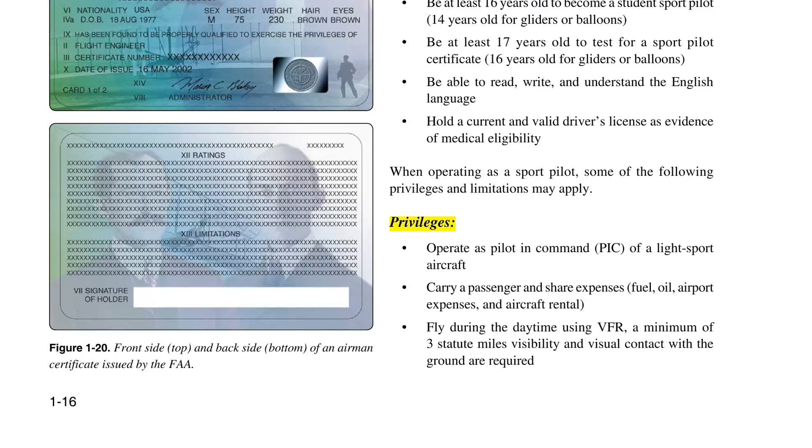When operating as a sport pilot, some of the following privileges and limitations may apply. Privileges: operate as pilot in command, PIC, of a light sport aircraft, carry a passenger and share expenses, fuel, oil, airport expenses, and aircraft rental. Fly during the daytime using VFR; a minimum of 3 statute miles visibility and visual contact with the ground are required. Limitations: prohibited from flying in Class A airspace, prohibited from flying in Class B, C, or D airspace until you receive training and a logbook endorsement from an instructor.

No flights outside the United States without prior permission from the foreign aviation authority. May not tow any object. No flights while carrying a passenger or property for compensation or hire. Prohibited from flying in furtherance of a business. The Sport Pilot Certificate does not list aircraft category and class ratings.

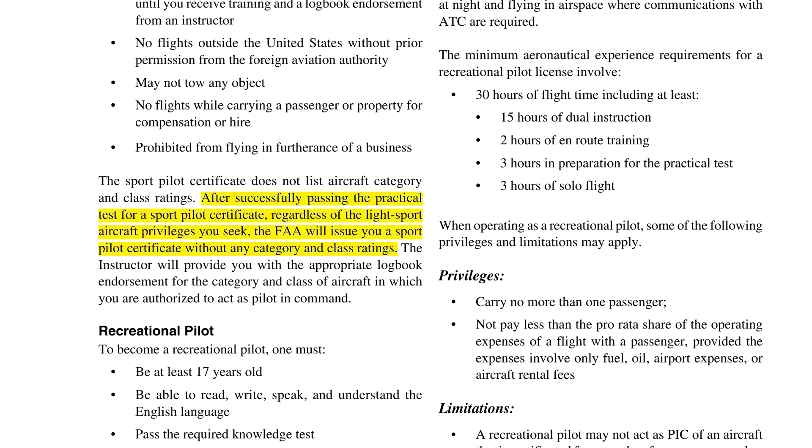After successfully passing the practical test for a Sport Pilot Certificate, regardless of the light sport aircraft privileges you seek, the FAA will issue you a Sport Pilot Certificate without any category and class ratings. The instructor will provide you with the appropriate logbook endorsement for the category and class of aircraft in which you are authorized to act as pilot in command. Recreational pilot.

To become a recreational pilot, one must be at least 17 years old, be able to read, write, speak, and understand the English language, pass the required knowledge test, meet the aeronautical experience requirements in either a single-engine airplane, a helicopter, or a gyroplane, obtain a logbook endorsement from an instructor, pass the required practical test, and obtain a third-class medical certificate issued under 14 CFR Part 67.

As a recreational pilot, cross-country flight is limited to a 50 nautical mile range from the departure airport but is permitted with additional training per 14 CFR Part 61, Section 61.101(c). Additionally, recreational pilots are restricted from flying at night and flying in airspace where communications with ATC are required.

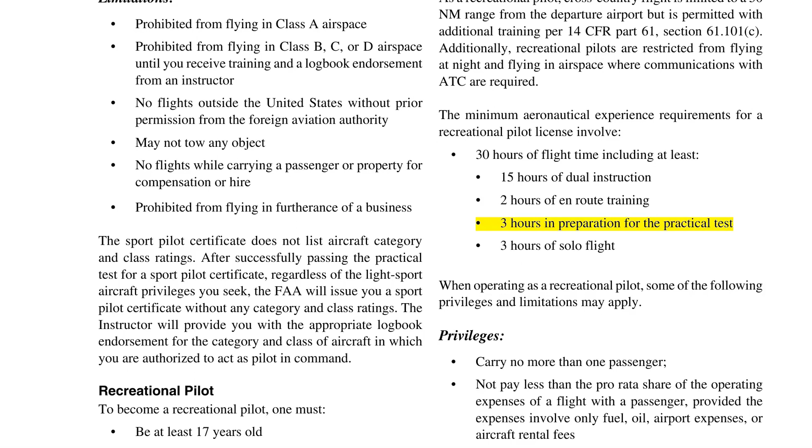The minimum aeronautical experience requirements for a recreational pilot license involve 30 hours of flight time including at least 15 hours of dual instruction, 2 hours of en route training, 3 hours in preparation for the practical test, and 3 hours of solo flight. When operating as a recreational pilot, some of the following privileges and limitations may apply.

Privileges: carry no more than one passenger, not pay less than the pro rata share of the operating expenses of a flight with a passenger, provided the expenses involve only fuel, oil, airport expenses, or aircraft rental fees. Limitations: a recreational pilot may not act as PIC of an aircraft that is certificated for more than 4 occupants or has more than one powerplant.

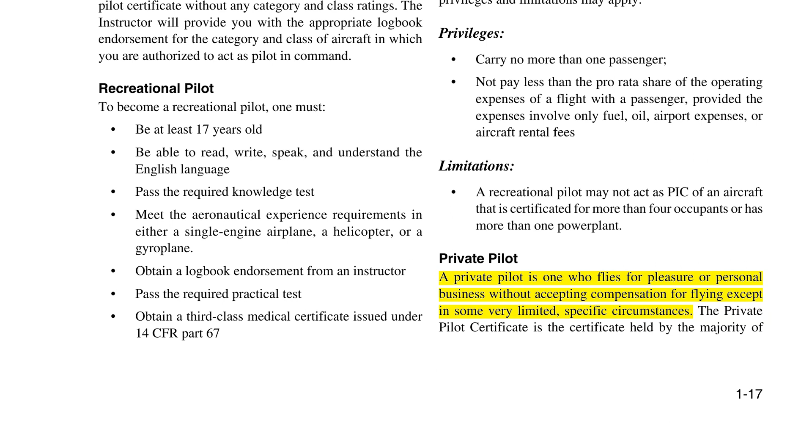Private pilot: a private pilot is one who flies for pleasure or personal business without accepting compensation for flying except in some very limited, specific circumstances. The private pilot certificate is the certificate held by the majority of active pilots. It allows command of any aircraft, subject to appropriate ratings, for any non-commercial purpose and gives almost unlimited authority to fly under VFR. Passengers may be carried, and flight in furtherance of a business is permitted.

However, a private pilot may not be compensated in any way for services as a pilot, although passengers can pay a pro rata share of flight expenses, such as fuel or rental costs. If training under 14 CFR Part 61, experience requirements include at least 40 hours of piloting time, including 20 hours of flight with an instructor and 10 hours of solo flight.

Figure 1-22. Commercial pilot. A commercial pilot may be compensated for flying. Training for the certificate focuses on a better understanding of aircraft systems and a higher standard of airmanship. The commercial pilot certificate itself does not allow a pilot to fly in instrument meteorological conditions, IMC, and commercial pilots without an instrument rating are restricted to daytime flight within 50 nautical miles when flying for hire.

A commercial airplane pilot must be able to operate a complex airplane, as a specific number of hours of complex, or turbine-powered, aircraft time are among the prerequisites, and at least a portion of the practical examination is performed in a complex aircraft. A complex aircraft must have retractable landing gear, movable flaps, and a controllable pitch propeller. See 14 CFR Part 61, Section 61.31(e) for additional information.

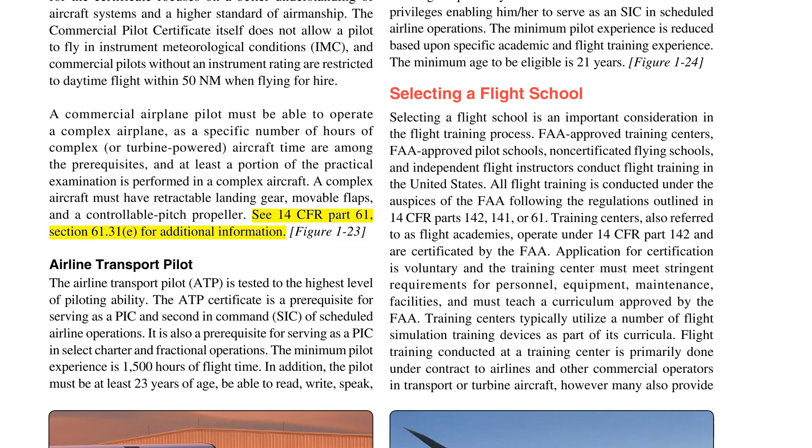Figure 1-23. Airline Transport Pilot. The Airline Transport Pilot, ATP, is tested to the highest level of piloting ability. The ATP certificate is a prerequisite for serving as a PIC and second in command, SIC, of scheduled airline operations. It is also a prerequisite for serving as a PIC in select charter and fractional operations. The minimum pilot experience is 1,500 hours of flight time.

In addition, the pilot must be at least 23 years of age, be able to read, write, speak, and understand the English language, and be of good moral standing. A pilot may obtain an ATP certificate with restricted privileges enabling him/her to serve as an SIC in scheduled airline operations. The minimum pilot experience is reduced based upon specific academic and flight training experience. The minimum age to be eligible is 21 years.

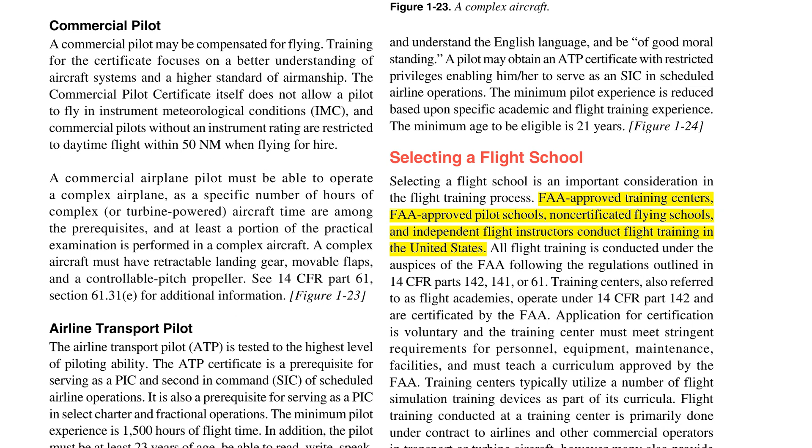Figure 1-24. Selecting a flight school. Selecting a flight school is an important consideration in the flight training process. FAA-approved training centers, FAA-approved pilot schools, non-certificated flying schools, and independent flight instructors conduct flight training in the United States. All flight training is conducted under the auspices of the FAA following the regulations outlined in 14 CFR Parts 142, 141, or 61.

Training centers, also referred to as flight academies, operate under 14 CFR Part 142 and are certificated by the FAA. Application for certification is voluntary and the training center must meet stringent requirements for personnel, equipment, maintenance, facilities, and must teach a curriculum approved by the FAA. Training centers typically utilize a number of flight simulation training devices as part of its curricula.

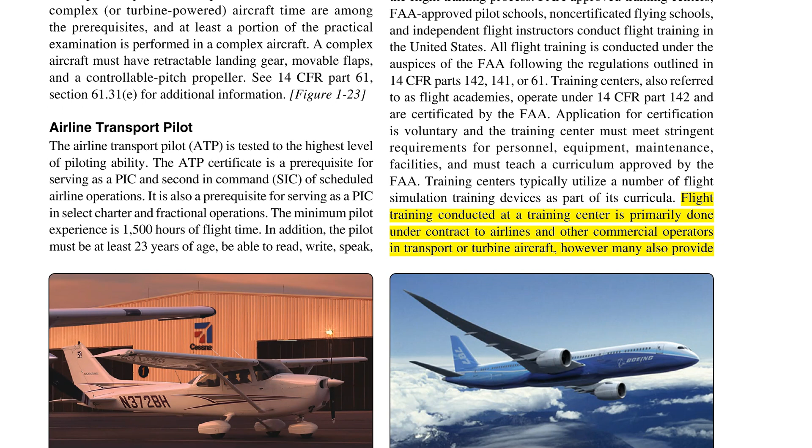Flight training conducted at a training center is primarily done under contract to airlines and other commercial operators in transport or turbine aircraft, however many also provide flight training for the private pilot certificate, commercial pilot certificate, instrument rating, and ATP certificate. Flight schools operating under 14 CFR Part 141 are certificated by the FAA.

Application for certification is voluntary and the school must meet stringent requirements for personnel, equipment, maintenance, facilities, and must teach an established curriculum, which includes a training course outline (TCO) approved by the FAA. The certificated schools may qualify for a ground school rating and a flight school rating. In addition, the school may be authorized to give its graduates practical (flight) tests and knowledge (computer-administered written) tests.

The FAA Pilot School Search Database located at http://av-info.faa.gov/pilotschool.asp lists certificated ground and flight schools and the pilot training courses each school offers. Enrollment in a 14 CFR Part 141 flight school ensures quality, continuity, and offers a structured approach to flight training because these facilities must document the training curriculum and have their flight courses approved by the FAA. These strictures allow 14 CFR Part 141 schools to complete certificates and ratings in fewer flight hours, which can mean a savings on the cost of flight training for the student pilot.

For example, the minimum requirement for a private pilot certificate is 35 hours in a Part 141 certificated school and 40 hours in a Part 61 certificated school. This difference may be insignificant for a private pilot certificate because the national average indicates most pilots require 60 to 75 hours of flight training.

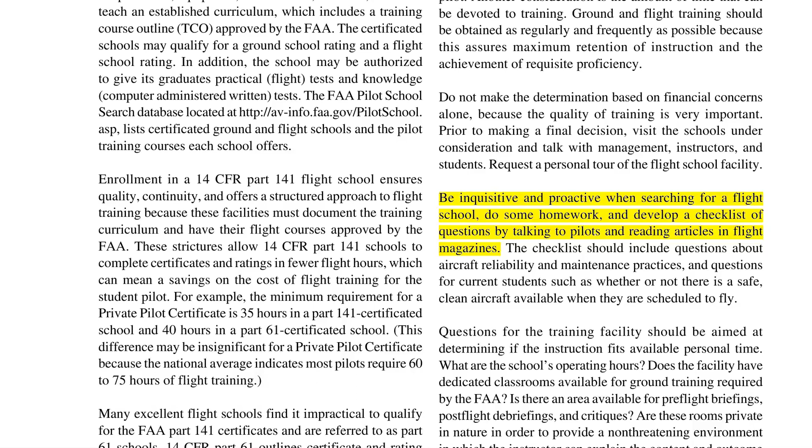Prior to making a final decision, visit the schools under consideration and talk with management, instructors, and students. Request a personal tour of the flight school facility. Be inquisitive and proactive when searching for a flight school, do some homework, and develop a checklist of questions by talking to pilots and reading articles in flight magazines. The checklist should include questions about aircraft reliability and maintenance practices, and questions for current students such as whether or not there is a safe, clean aircraft available when they are scheduled to fly.

Questions for the training facility should be aimed at determining if the instruction fits available personal time. What are the school's operating hours? Does the facility have dedicated classrooms available for ground training required by the FAA? Is there an area available for pre-flight briefings, post-flight debriefings, and critiques? Are these rooms private in nature in order to provide a non-threatening environment in which the instructor can explain the content and outcome of the flight without making the student feel self-conscious?

Examine the facility before committing to any flight training. Evaluate the answers on the checklist, and then take time to think things over before making a decision. This proactive approach to choosing a flight school will ensure a student pilot contracts with a flight school or flight instructor best suited to their individual needs.

How to choose a Certificated Flight Instructor (CFI). Whether an individual chooses to train under 14 CFR Part 141 or Part 61, the key to an effective flight program is the quality of the ground and flight training received from the CFI. The flight instructor assumes total responsibility for training an individual to meet the standards required for certification within an ever-changing operating environment. A CFI should possess an understanding of the learning process, knowledge of the fundamentals of teaching, and the ability to communicate effectively with the student pilot.

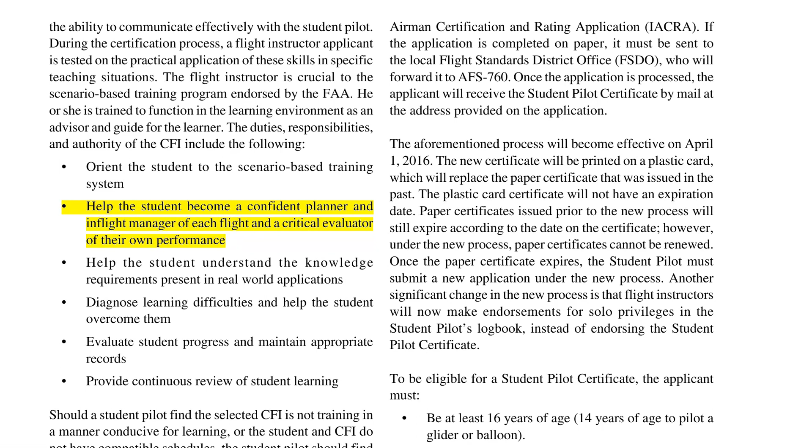Orient the student to the scenario-based training system. Help the student become a confident planner and in-flight manager of each flight and a critical evaluator of their own performance. Help the student understand the knowledge requirements present in real-world applications. Diagnose learning difficulties and help the student overcome them. Evaluate student progress and maintain appropriate records. Provide continuous review of student learning.

Should a student pilot find the selected CFI is not training in a manner conducive for learning, or the student and CFI do not have compatible schedules, the student pilot should find another CFI. Choosing the right CFI is important because the quality of instruction and the knowledge and skills acquired from their flight instructor affect a student pilot's entire flying career.

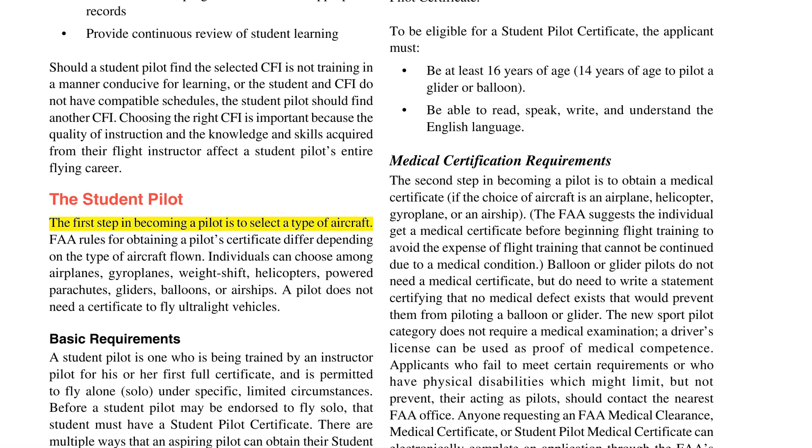The student pilot. The first step in becoming a pilot is to select a type of aircraft. FAA rules for obtaining a pilot's certificate differ depending on the type of aircraft flown. Individuals can choose among airplanes, gyroplanes, weight shift, helicopters, powered parachutes, gliders, balloons, or airships. A pilot does not need a certificate to fly ultralight vehicles.

Basic requirements. A student pilot is one who is being trained by an instructor pilot for his or her first full certificate, and is permitted to fly alone, solo, under specific, limited circumstances. Before a student pilot may be endorsed to fly solo, that student must have a student pilot certificate. There are multiple ways that an aspiring pilot can obtain their student pilot certificate. The application may be processed by an FAA inspector or technician, an FAA designated pilot examiner, a certified flight instructor, CFI, or an Airman Certification Representative, ACR.

If the application is completed electronically, the authorized person will submit the application to the FAA's Airman Certification Branch, AFS-760, in Oklahoma City, Oklahoma, via the Integrated Airman Certification and Rating Application, IACRA. If the application is completed on paper, it must be sent to the local Flight Standards District Office, FSDO, who will forward it to AFS-760. Once the application is processed, the applicant will receive the student pilot certificate by mail at the address provided on the application. The aforementioned process will become effective on April 1, 2016.

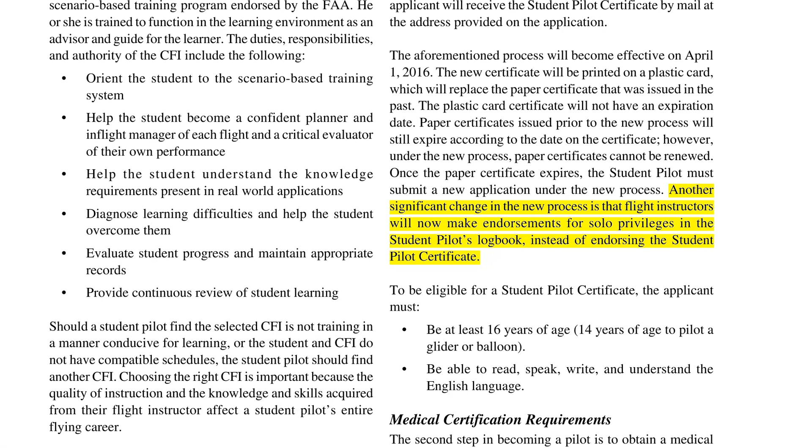The new certificate will be printed on a plastic card, which will replace the paper certificate that was issued in the past. The plastic card certificate will not have an expiration date. Paper certificates issued prior to the new process will still expire according to the date on the certificate. However, under the new process, paper certificates cannot be renewed. Once the paper certificate expires, the student pilot must submit a new application under the new process. Another significant change in the new process is that flight instructors will now make endorsements for solo privileges in the student pilot's logbook, instead of endorsing the student pilot certificate.

To be eligible for a student pilot certificate, the applicant must be at least 16 years of age, 14 years of age to pilot a glider or balloon, and be able to read, speak, write, and understand the English language. Medical certification requirements. The second step in becoming a pilot is to obtain a medical certificate, if the choice of aircraft is an airplane, helicopter, gyroplane, or an airship. The FAA suggests the individual get a medical certificate before beginning flight training to avoid the expense of flight training that cannot be continued due to a medical condition.

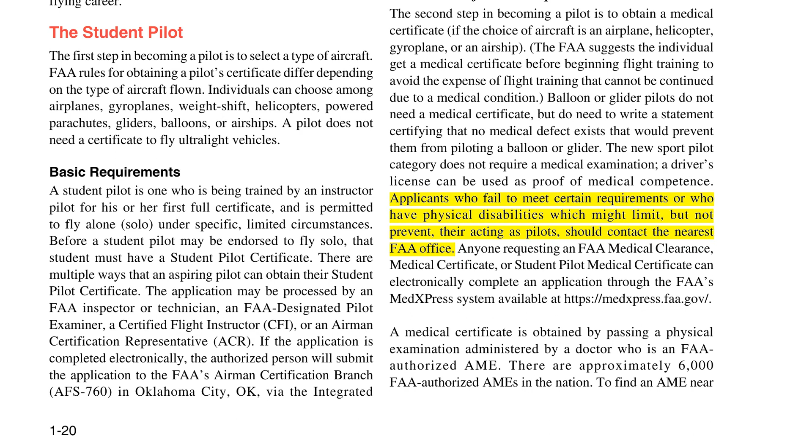Balloon or glider pilots do not need a medical certificate, but do need to write a statement certifying that no medical defect exists that would prevent them from piloting a balloon or glider. The new sport pilot category does not require a medical examination. A driver's license can be used as proof of medical competence. Applicants who fail to meet certain requirements or who have physical disabilities which might limit, but not prevent, their acting as pilots, should contact the nearest FAA office.

Anyone requesting an FAA medical clearance, medical certificate, or student pilot medical certificate can electronically complete an application through the FAA's MedXPress system available at https://medxpress.faa.gov/. A medical certificate is obtained by passing a physical examination administered by a doctor who is an FAA authorized AME. There are approximately 6,000 FAA authorized AMEs in the nation. To find an AME near you, go to the FAA's AME locator at www.faa.gov/pilots/amelocator/. Medical certificates are designated as first class, second class, or third class. Generally, first class is designed for the airline transport pilot, second class for the commercial pilot, and third class for the student, recreational, and private pilot.

A student pilot certificate can be processed by an FAA inspector or technician, an FAA designated pilot examiner (DPE), an Airman Certification Representative (ACR), or a Certified Flight Instructor (CFI). This certificate allows an individual who is being trained by a flight instructor to fly alone, solo, under specific, limited circumstances and must be carried with the student pilot while exercising solo flight privileges.

The student pilot certificate is only required when exercising solo flight privileges. The new plastic student certificate does not have an expiration date. For airmen who were issued a paper certificate, that certificate will remain valid until its expiration date. A paper certificate cannot be renewed. When the paper certificate expires, a new application must be completed via the IACRA system, and a new plastic certificate will be issued.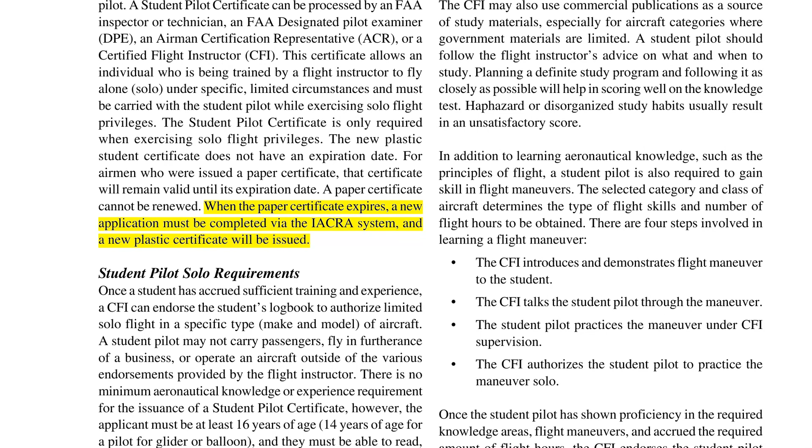Student pilot solo requirements. Once a student has accrued sufficient training and experience, a CFI can endorse the student's logbook to authorize limited solo flight in a specific type, make and model, of aircraft. A student pilot may not carry passengers, fly in furtherance of a business, or operate an aircraft outside of the various endorsements provided by the flight instructor.

There is no minimum aeronautical knowledge or experience requirement for the issuance of a student pilot certificate. However, the applicant must be at least 16 years of age, 14 years of age for a pilot for glider or balloon, and they must be able to read, speak, write and understand the English language. There are, however, minimum aeronautical knowledge and experience requirements for student pilots to solo.

Becoming a pilot. The course of instruction a student pilot follows depends on the type of certificate sought. It should include the ground and flight training necessary to acquire the knowledge and skills required to safely and efficiently function as a certificated pilot in the selected category and class of aircraft. The specific knowledge and skill areas for each category and class of aircraft are outlined in 14 CFR Part 61.

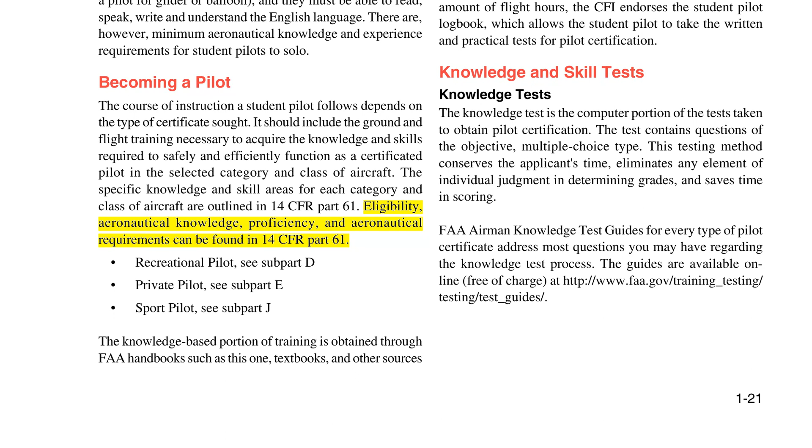Eligibility, aeronautical knowledge, proficiency, and aeronautical requirements can be found in 14 CFR Part 61. Recreational pilot, see Subpart D. Private pilot, see Subpart E. Sport pilot, see Subpart J.

The knowledge-based portion of training is obtained through FAA handbooks such as this one, textbooks, and other sources of training and testing materials which are available in print form from the Superintendent of Documents, GPO, and online at the Regulatory Support Division, www.faa.gov/about/office_org/headquarters_offices/avs/offices/afs/AFS600. The CFI may also use commercial publications as a source of study materials, especially for aircraft categories where government materials are limited.

A student pilot should follow the flight instructor's advice on what and when to study. Planning a definite study program and following it as closely as possible will help in scoring well on the knowledge test. Haphazard or disorganized study habits usually result in an unsatisfactory score.

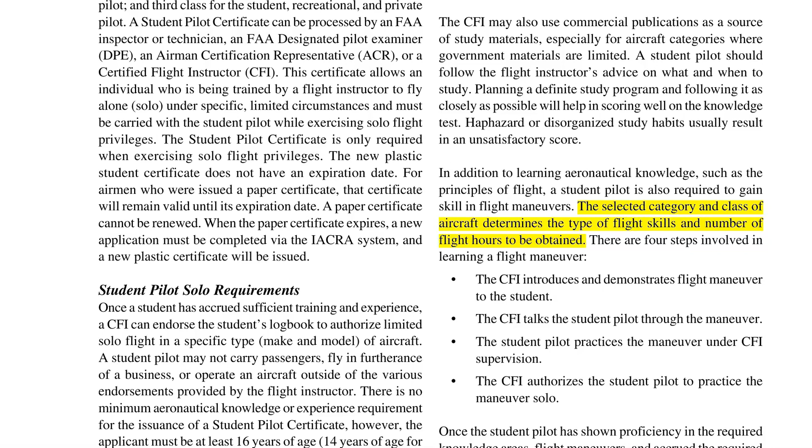In addition to learning aeronautical knowledge, such as the principles of flight, a student pilot is also required to gain skill in flight maneuvers. The selected category and class of aircraft determines the type of flight skills and number of flight hours to be obtained. There are 4 steps involved in learning a flight maneuver.

Once the student pilot has shown proficiency in the required knowledge areas, flight maneuvers, and accrued the required amount of flight hours, the CFI endorses the student pilot logbook, which allows the student pilot to take the written and practical tests for pilot certification. Knowledge and skill tests.

Knowledge tests. The knowledge test is the computer portion of the test taken to obtain pilot certification. The test contains questions of the objective, multiple choice type. This testing method conserves the applicant's time, eliminates any element of individual judgment in determining grades, and saves time in scoring.

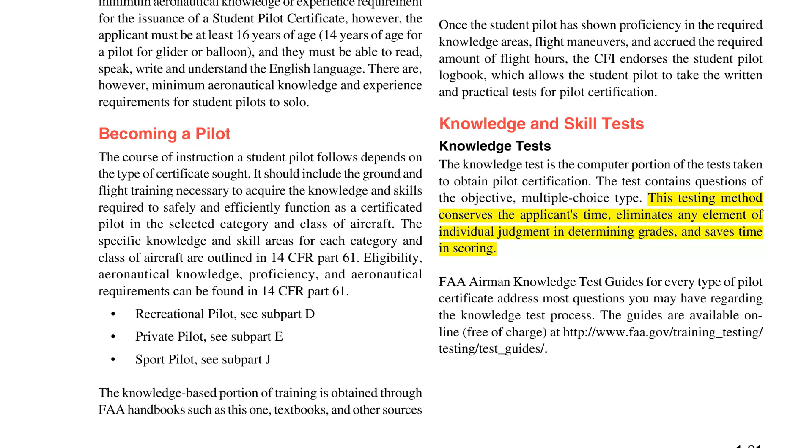FAA Airman Knowledge Test Guides for every type of pilot certificate address most questions you may have regarding the knowledge test process. The guides are available online, free of charge, at http://www.faa.gov/training_testing/testing/test_guides/.

The CFI introduces and demonstrates the flight maneuver to the student. The CFI talks the student pilot through the maneuver. The student pilot practices the maneuver under CFI supervision. The CFI authorizes the student pilot to practice the maneuver solo.

When to take the knowledge test. The knowledge test is more meaningful to the applicant and more likely to result in a satisfactory grade if it is taken after beginning the flight portion of the training. Therefore, the FAA recommends the knowledge test be taken after the student pilot has completed a solo cross-country flight. The operational knowledge gained by this experience can be used to the student's advantage in the knowledge test. The student pilot's CFI is the best person to determine when the applicant is ready to take the knowledge test.

Practical test. The FAA has developed PTS for FAA pilot certificates and associated ratings. Figure 1-25. In 2015, the FAA began transitioning to the ACS approach. The ACS is essentially an enhanced version of the PTS.

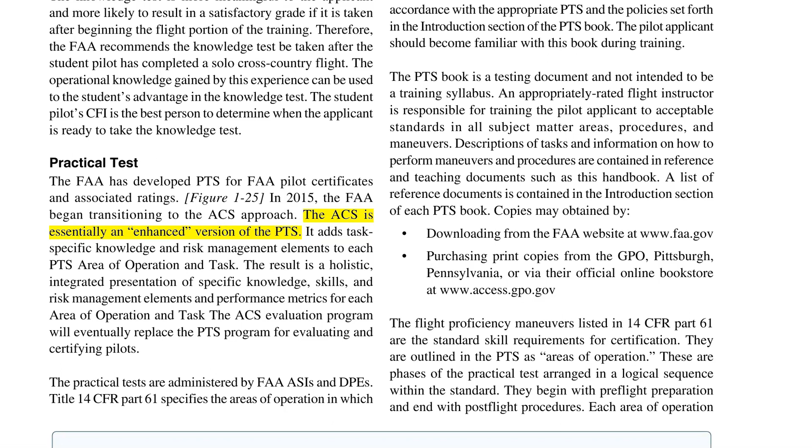It adds task-specific knowledge and risk management elements to each PTS area of operation and task. The result is a holistic, integrated presentation of specific knowledge, skills, and risk management elements and performance metrics for each area of operation and task. The ACS evaluation program will eventually replace the PTS program for evaluating and certifying pilots. The practical tests are administered by FAA ASIs and DPEs.

Title 14 CFR Part 61 specifies the areas of operation in which knowledge and skill must be demonstrated by the applicant. Since the FAA requires all practical tests be conducted in accordance with the appropriate PTS and the policies set forth in the introduction section of the PTS book, the pilot applicant should become familiar with this book during training. The PTS book is a testing document and not intended to be a training syllabus.

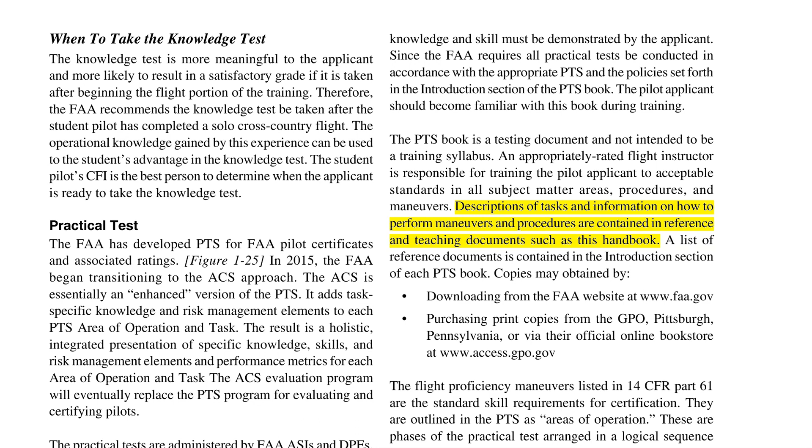An appropriately rated flight instructor is responsible for training the pilot applicant to acceptable standards in all subject matter areas, procedures, and maneuvers. Descriptions of tasks and information on how to perform maneuvers and procedures are contained in reference and teaching documents such as this handbook. A list of reference documents is contained in the introduction section of each PTS book. Copies may be obtained by downloading from the FAA website at www.faa.gov, purchasing print copies from the GPO, Pittsburgh, Pennsylvania, or via their official online bookstore at www.access.gpo.gov. The flight proficiency maneuvers listed in 14 CFR Part 61 are the standard skill requirements for certification.

They are outlined in the PTS as areas of operation. These are phases of the practical test arranged in a logical sequence within the standard. They begin with pre-flight preparation and end with post-flight procedures. Each area of operation contains tasks, which are comprised of knowledge areas, flight procedures, and/or flight maneuvers appropriate to the area of operation. The candidate is required to demonstrate knowledge and proficiency in all tasks for the original issuance of all pilot certificates.

When to take the practical test. 14 CFR Part 61 establishes the ground school and flight experience requirements for the type of certification and aircraft selected. However, the CFI best determines when an applicant is qualified for the practical test. A practice practical test is an important step in the flight training process.

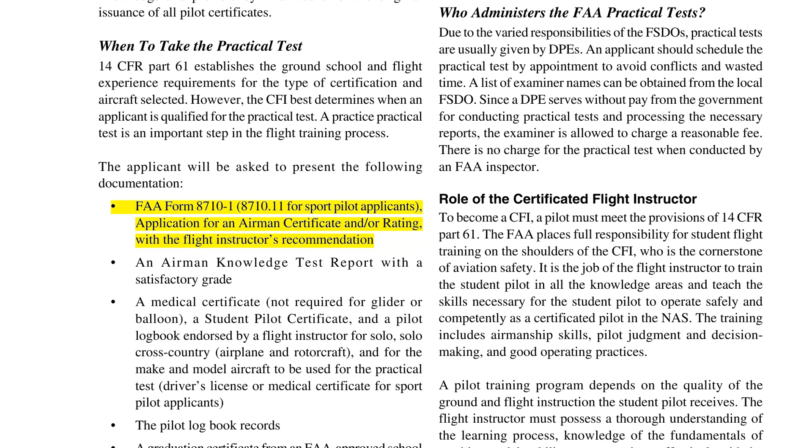The applicant will be asked to present the following documentation: FAA Form 8710-1, 8710.11 for sport pilot applicants, application for an Airman Certificate and/or rating, with the flight instructor's recommendation, an Airman Knowledge Test report with a satisfactory grade, a medical certificate, not required for glider or balloon, a student pilot certificate, and a pilot logbook endorsed by a flight instructor for solo cross-country, airplane and rotorcraft, and for the make and model aircraft to be used for the practical test, driver's license or medical certificate for sport pilot applicants. The pilot logbook records, a graduation certificate from an FAA-approved school, if applicable.

The applicant must provide an airworthy aircraft with equipment relevant to the areas of operation required for the practical test. He or she will also be asked to produce and explain the aircraft's registration certificate, aircraft's airworthiness certificate, aircraft's operating limitations or FAA-approved aircraft flight manual, if required, aircraft equipment list, required weight and balance data, maintenance records, applicable airworthiness directives, ADs.

For a detailed explanation of the required pilot maneuvers and performance standards, refer to the PTS pertaining to the type of certification and aircraft selected. These standards may be downloaded free of charge from the FAA at www.faa.gov. They may also be purchased from the Superintendent of Documents or GPO bookstores. Most airport fixed base operators and flight schools carry a variety of government publications and charts, as well as commercially published materials.

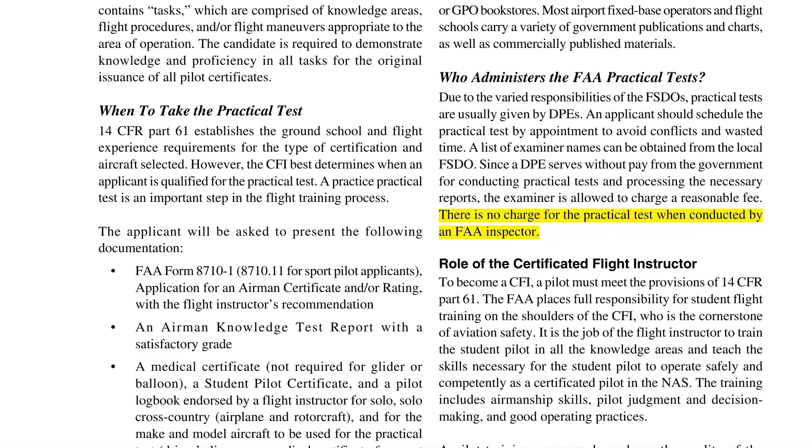Who administers the FAA practical tests? Due to the varied responsibilities of the FSDOs, practical tests are usually given by DPEs. An applicant should schedule the practical test by appointment to avoid conflicts and wasted time. A list of examiner names can be obtained from the local FSDO. Since a DPE serves without pay from the government for conducting practical tests and processing the necessary reports, the examiner is allowed to charge a reasonable fee. There is no charge for the practical test when conducted by an FAA inspector.

Role of the Certificated Flight Instructor. To become a CFI, a pilot must meet the provisions of 14 CFR Part 61. The FAA places full responsibility for student flight training on the shoulders of the CFI, who is the cornerstone of aviation safety. It is the job of the flight instructor to train the student pilot in all the knowledge areas and teach the skills necessary for the student pilot to operate safely and competently as a certificated pilot in the NAS. The training includes airmanship skills, pilot judgment and decision-making, and good operating practices. A pilot training program depends on the quality of the ground and flight instruction the student pilot receives.

The flight instructor must possess a thorough understanding of the learning process, knowledge of the fundamentals of teaching, and the ability to communicate effectively with the student pilot. Use of a structured training program and formal course syllabus is crucial for effective and comprehensive flight training. It should be clear to the student in advance of every lesson what the course of training will involve and the criteria for successful completion. This should include the flight instructor briefing and debriefing the student before and after every lesson.

Additionally, scenario-based training has become the preferred method of flight instruction today. This involves presenting the student with realistic flight scenarios and recommended actions for mitigating risk. Insistence on correct techniques and procedures from the beginning of training by the flight instructor ensures that the student pilot develops proper flying habits. Any deficiencies in the maneuvers or techniques must immediately be emphasized and corrected.

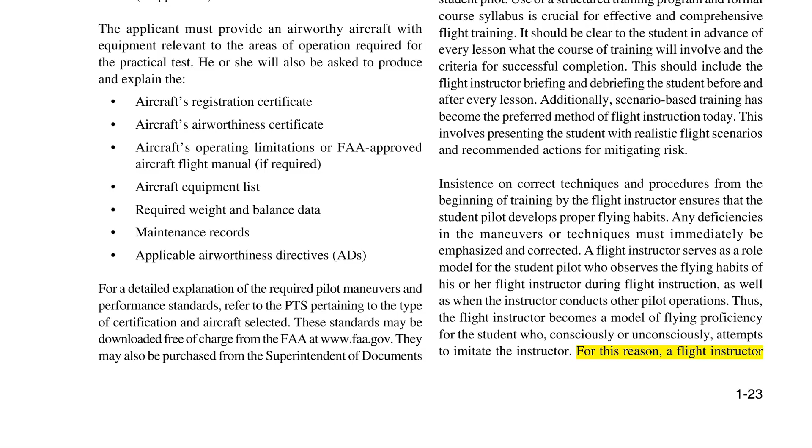A flight instructor serves as a role model for the student pilot who observes the flying habits of his or her flight instructor during flight instruction, as well as when the instructor conducts other pilot operations. Thus, the flight instructor becomes a model of flying proficiency for the student who, consciously or unconsciously, attempts to imitate the instructor. For this reason, a flight instructor should observe recognized safety practices, as well as regulations during all flight operations.

The student pilot who enrolls in a pilot training program commits considerable time, effort, and expense to achieve a pilot certificate. Students often judge the effectiveness of the flight instructor and the success of the pilot training program based on their ability to pass the requisite FAA practical test. A competent flight instructor stresses to the student that practical tests are a sampling of pilot ability compressed into a short period of time. The goal of a flight instructor is to train the total pilot.

Role of the Designated Pilot Examiner. The Designated Pilot Examiner, DPE, plays an important role in the FAA's mission of promoting aviation safety by administering FAA practical tests for pilot and flight instructor certificates and associated ratings. Although administering these tests is a responsibility of the ASI, the FAA's highest priority is making air travel safer by inspecting aircraft that fly in the United States.

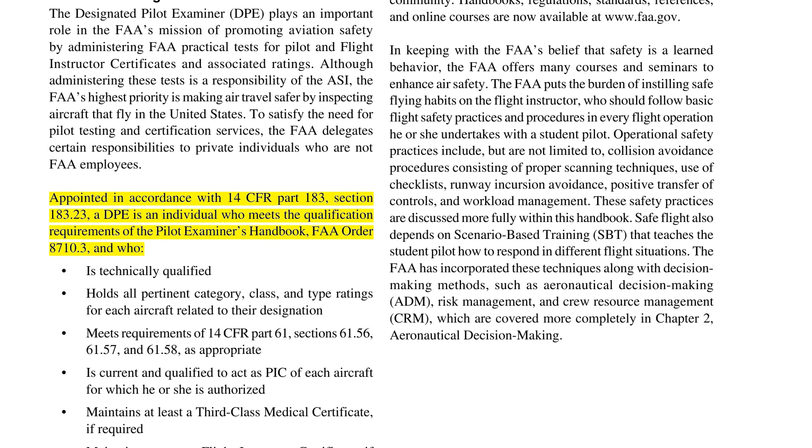To satisfy the need for pilot testing and certification services, the FAA delegates certain responsibilities to private individuals who are not FAA employees. Appointed in accordance with 14 CFR Part 183, Section 183.23, a DPE is an individual who meets the qualification requirements of the Pilot Examiner's Handbook, FAA Order 8710.3, and who is technically qualified, holds all pertinent category, class, and type ratings for each aircraft related to their designation,

meets requirements of 14 CFR Part 61, Sections 61.56, 61.57, and 61.58, as appropriate, is current and qualified to act as PIC of each aircraft for which he or she is authorized, maintains at least a third-class medical certificate, if required, and maintains a current flight instructor certificate, if required. Designated to perform specific pilot certification tasks on behalf of the FAA, a DPE may charge a reasonable fee.

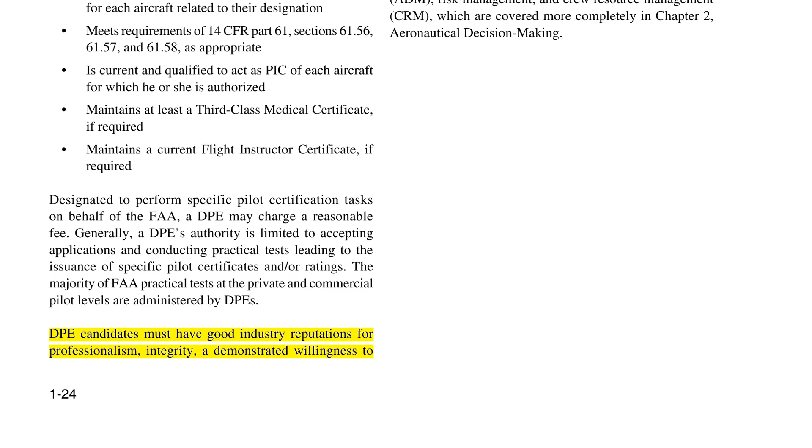Generally, a DPE's authority is limited to accepting applications and conducting practical tests leading to the issuance of specific pilot certificates and/or ratings. The majority of FAA practical tests at the private and commercial pilot levels are administered by DPEs. DPE candidates must have good industry reputations for professionalism, integrity, a demonstrated willingness to serve the public, and must adhere to FAA policies and procedures in certification matters. The FAA expects the DPE to administer practical tests with the same degree of professionalism, using the same methods, procedures, and standards as an FAA ASI.

Chapter Summary. The FAA has entered the second century of civil aviation as a robust government organization and is taking full advantage of technology, such as Global Positioning System, GPS, satellite technology to enhance the safety of civil aviation. The Internet has also become an important tool in promoting aviation safety and providing around-the-clock resources for the aviation community. Handbooks, regulations, standards, references, and online courses are now available at www.faa.gov.

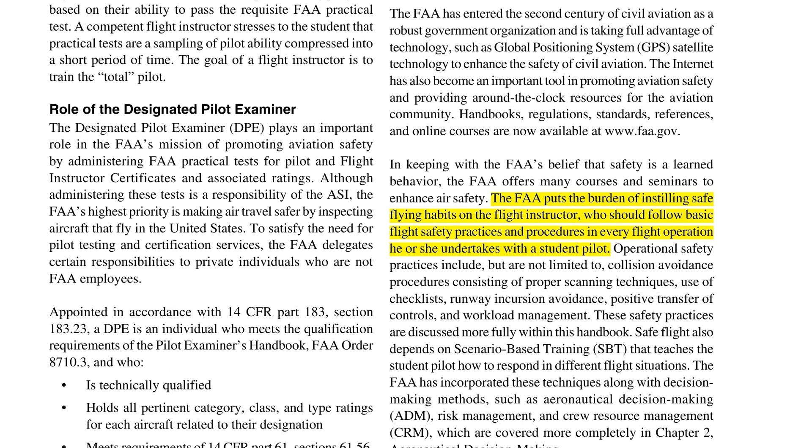In keeping with the FAA's belief that safety is a learned behavior, the FAA offers many courses and seminars to enhance air safety. The FAA puts the burden of instilling safe flying habits on the flight instructor, who should follow basic flight safety practices and procedures in every flight operation he or she undertakes with a student pilot. Operational safety practices include, but are not limited to, collision avoidance procedures consisting of proper scanning techniques, use of checklists, runway incursion avoidance, positive transfer of controls, and workload management. These safety practices are discussed more fully within this handbook.

Safe flight also depends on scenario-based training, SBT, that teaches the student pilot how to respond in different flight situations. The FAA has incorporated these techniques along with decision-making methods, such as aeronautical decision-making, ADM, risk management, and crew resource management, CRM, which are covered more completely in Chapter 2, Aeronautical Decision-Making.